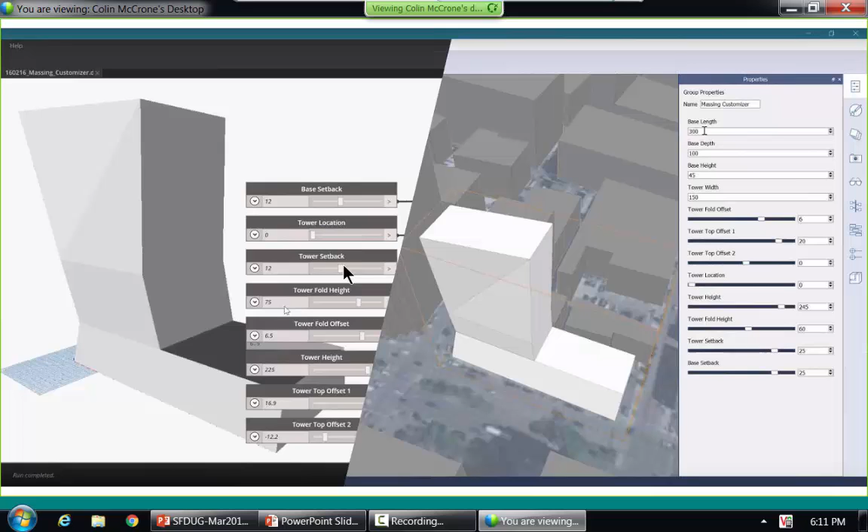Was there a question? Okay.

All right, so you can already publish that, and you have something called a customizer which you can share. And now you can actually use that and put it right into a FormIt model too, which is new functionality that just came out.

Another thing I really want to show is that in the last month or so, the number of Dynamo user groups in the world has exploded from 4 to 15. These are groups that have cities in and of themselves. I made this graphic, so I know what they are: Boston, Atlanta, Chicago, Copenhagen, Dublin, Netherlands, San Francisco, Seattle, Southern UK, Singapore, Shanghai, Washington, LA, Tokyo, and Northern UK. That's pretty cool that happened in the last 4 weeks.

Anyway, I just finished a blog post on that will come out tomorrow, with some other things like that. So, yes, go ahead.

I have to reconnect to the WebEx. I don't think they're getting audio. Sorry, we may not have network. There's no Wi-Fi today, I think. We got a network access attack this week, so sorry about that. Welcome to WebEx, enter your access code or meeting number followed by pound. Do I have to reconnect too? No, no. Enter your attendee ID number followed by pound. Has anybody not gotten the thumb drive? Hello, people on the call, can you hear me? Can you let me know on the chat panel? All right, sorry about that. Go ahead.

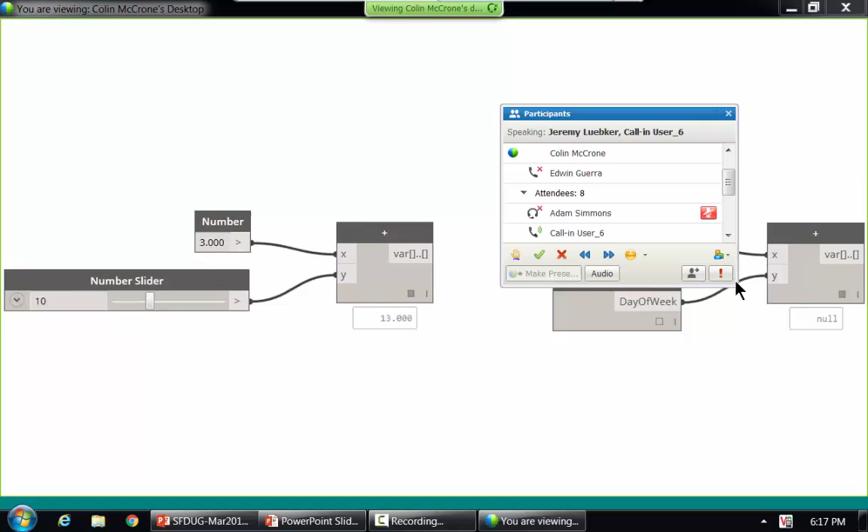And in this case, you'll see this - it's like a racetrack. You'll also see this thing show up in the plus node, which is a good example. Sometimes you'll see this var bracket bracket dot dot bracket bracket.

I had this really great question from Paul Aubin. He emailed me a few weeks ago, and it was this one-liner email that said, 'What does var bracket bracket dot dot bracket bracket mean?' I hope it's a simple answer, which is hysterical, but yeah, I hope so.

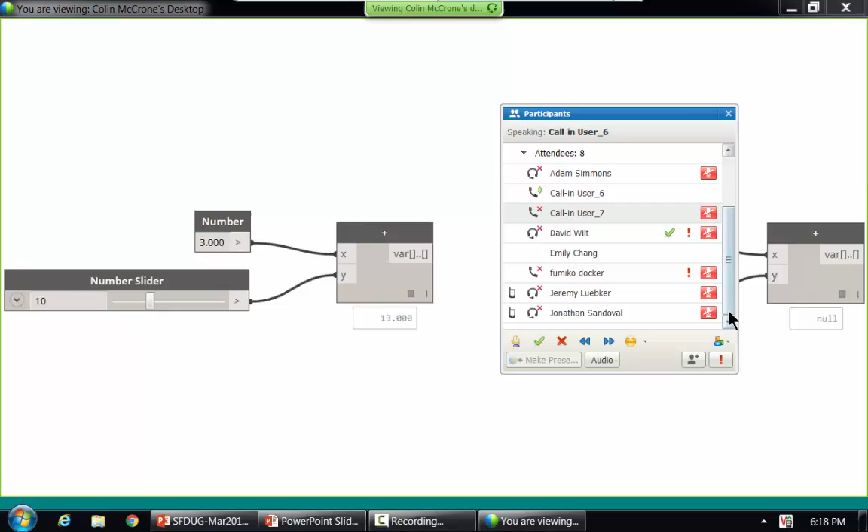So first of all, you know what the var means - the var is just a data type. It just means something, it's just kind of a placeholder. The bracket bracket thing we'll get to next. But I just want to point out that these nodes, like the plus sign, a lot of stuff can come out of it. So you can actually have a double or an integer go in. You can also have text go in, and you can concatenate strings, like stick two strings together to make a longer word, for example. So any sort of thing can come out, which is why you see this, just kind of like, we don't know.

All right, so the next part is - so we know what just the data type is, and then we also need to know about the structures. And so this is kind of how Dynamo talks about structure: you'll see, like if you have a single item, you can take just sort of - on the left it's just a single thing. So in this case it's peas, just one thing, there's always just one. If you have any more structure to the data, say you have a group of them, like in a pod.

This is like a one-dimensional thing. So in order to find any particular pea in that pod, you only need one piece of information, like how far it is from the left or something like that. There's only one coordinate, sort of like your address on a street. So it's a list - you have this bracket bracket in Dynamo. So you'll see that when you hover over input or output ports.

Then you have more complex stuff - so you have like a two-dimensional array, which is bracket bracket bracket bracket. But that just means that now you need two pieces of information to find any one pea. You need to know which pod, and then how far from the left side or something like that. And then there's this thing in Dynamo, which is an arbitrary structure - like it could be a mess, it could be well organized. It's whatever you want. This is like when you get that dot dot.

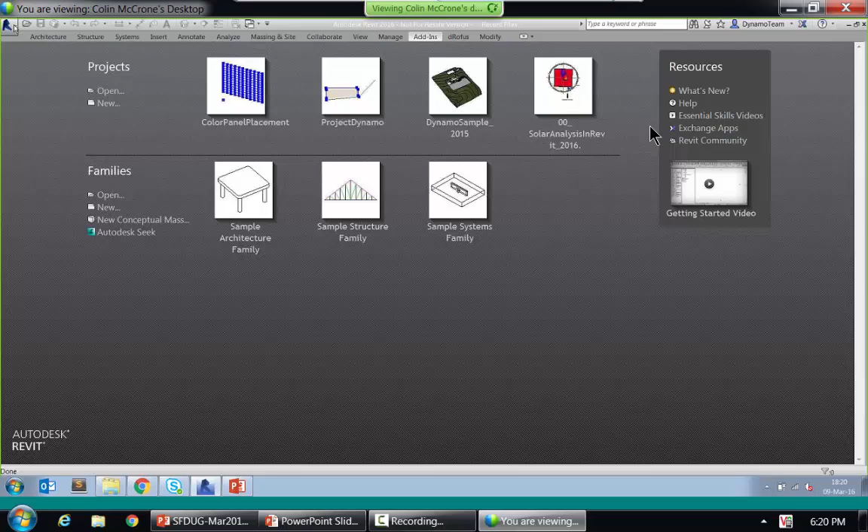Okay, so I just open up a mass file, and what I'm going to do is make some reference points so I can reference them and sort of move them around and group them. I'll show a couple different examples of what I mean by this.

So the first thing I'm going to do is look at a node called Circle, by center point radius.

If I zoom in and hover over this, it's kind of hard to tell, but the first thing says Point, capital P. So if I gave it something like a day of the week, it wouldn't work - I'd get a null value. It's looking for something that's a point to be the origin. Then it's looking for a double value, a radius. There's no bracket here at all, it's just a single thing - a single point, and then a single number that's a radius.

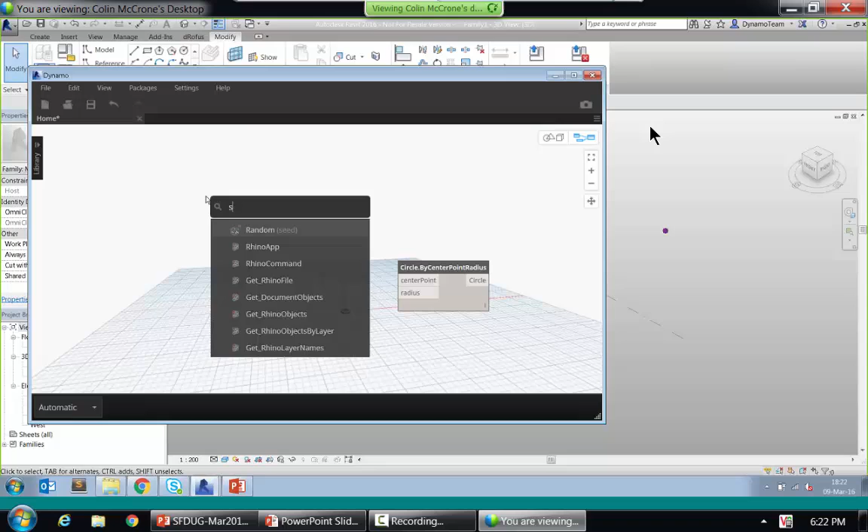So we can give it a few points here. I'm just going to create some points. Here are some reference points. So what I'll do in Dynamo to get those is select them - I'll say Select Model Elements, just waiting for a selection here, so I'll get those. I just have a bunch of points.

And if I look at this, I can already tell that I have a list of things, and they're giving me reference points, so it's an element. What I want to do is just get the geometry from this - Element.Geometry. So this is going to give me the points from that.

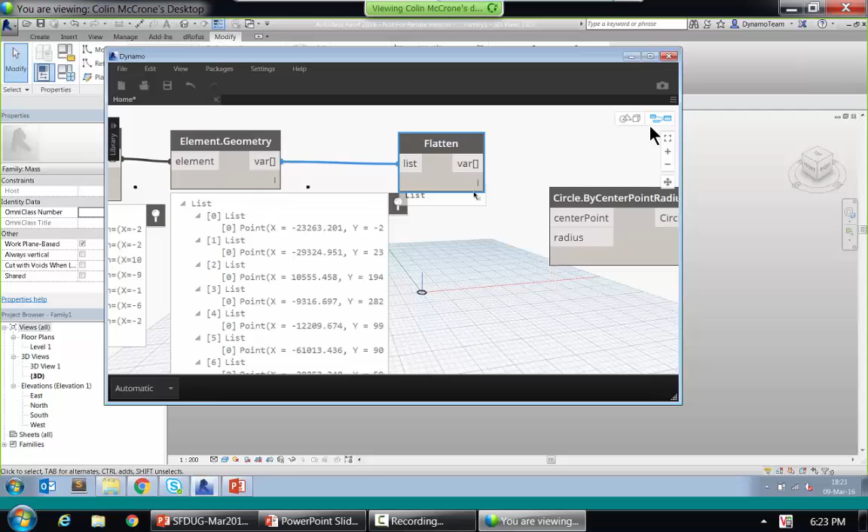So if I hover over this and pin it, you can see I have this sort of messy structure. I'll get back to the circles in a second. I'm just going to flatten this list because all I wanted was a list of points to show what happens. Pretend like this is our input here - all I did was select a bunch of model reference points, got the point from them, and got rid of that structure we didn't need. So here's the input - now I have a bunch of different points.

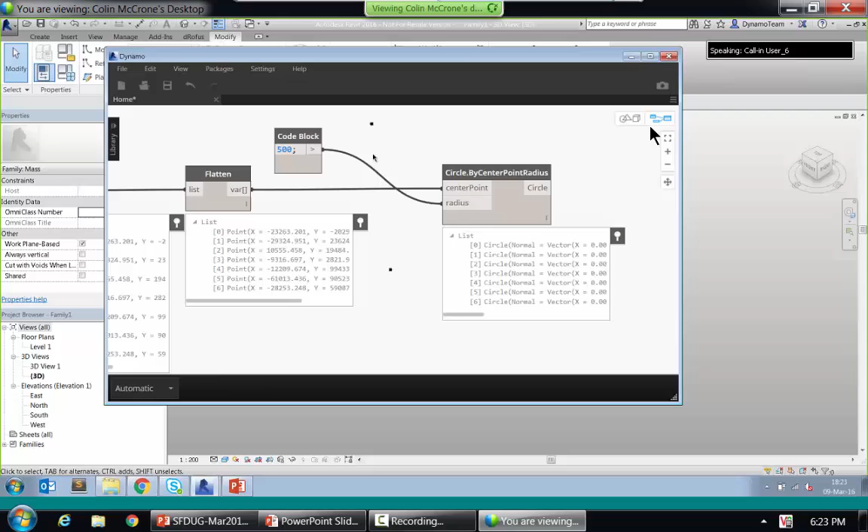But Circle.ByCenterPointRadius is looking for a single point, and since I'm going to give it a bunch of points, I'm going to get a bunch of circles. In fact, all my circles are really small because this is in millimeters, so I'm going to give it a different radius - I'll double click and give this a big radius of, say, 500 millimeters. Man, I am not used to thinking in metric. There we go, a little bit bigger - let me make them super big. Okay, so here are my circles.

So what happened is this is a list of points, and the reason I have a list of circles that came out is because this node is only expecting one point. So since I gave it seven points, this node basically acts 7 times until it stops.

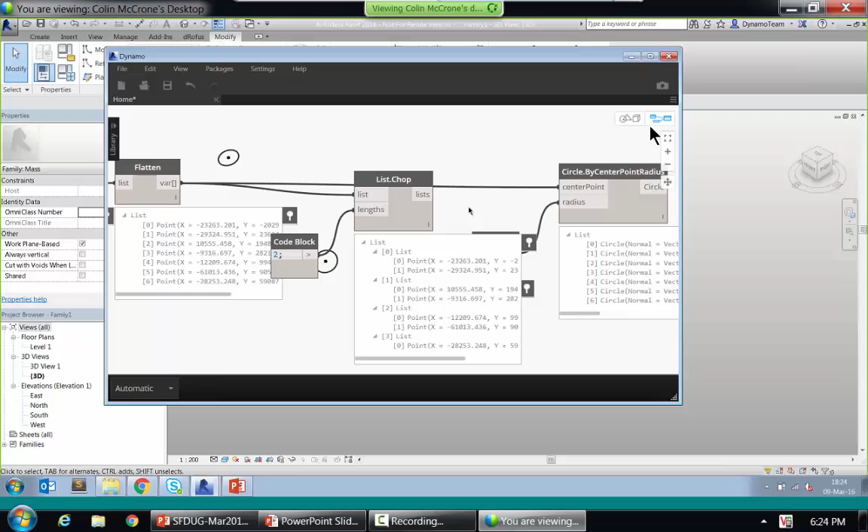And I can actually introduce some more complexity in this data too - I could say List.Chop. One of the things List.Chop does is divide this list up into lengths of things. So now I have a list of lists of points. But since Circle.ByCenterPointRadius is still just looking for a single point, it's still going to work because the first time it finds a single point buried in the data structure.

So you know that Dynamo can be super sensitive to the data structure based on how it works, but it's also based on the node. The reason this worked as well as it did is because it was expecting just a single point - it doesn't matter what I threw at it, it will replicate the same number of times so I get the same data structure out as I went in. Was that confusing? Yes, okay.

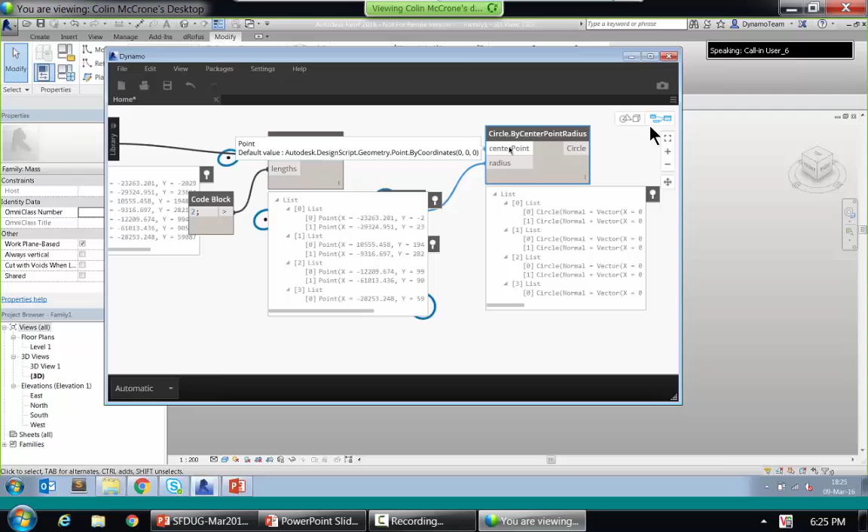All right, so let's see if I could do it another way. I still have the same number of circles - you can see the input list of points matches the input list and structure of the circles that come out. But the same would have been true if I had just taken the first one - I'll say First Item from this, so this is going to be just a single point.

And I can just pin this guy. All right. So in this case, now I have just... I lost my, there we go.

So I have a single point and a single circle. By the way, we're redoing these preview bubbles, they're a little weird. Anyway, now what I have is it expected a single point and a single radius, so that's what I gave it. I gave it a single point and one radius, and I get one result. If I gave it any structure of more points, I'll still get the same result because the data structure matches the input structure.

Because it's just looking for a single thing, I think it'll be clearer if I show you another example. So instead of making a circle, I'm going to make... it'll take, when you give it multiple points within a list, it took the list and ran the points.

But every time it found a new point, it gave me a completely new circle. If I gave it two different points, I'm going to have two different circles. It doesn't matter where the points are or what they look like, it'll just give me a circle per every point because it only wants one. But this is not the only type of thing, this is the easy example. It only wants one thing.

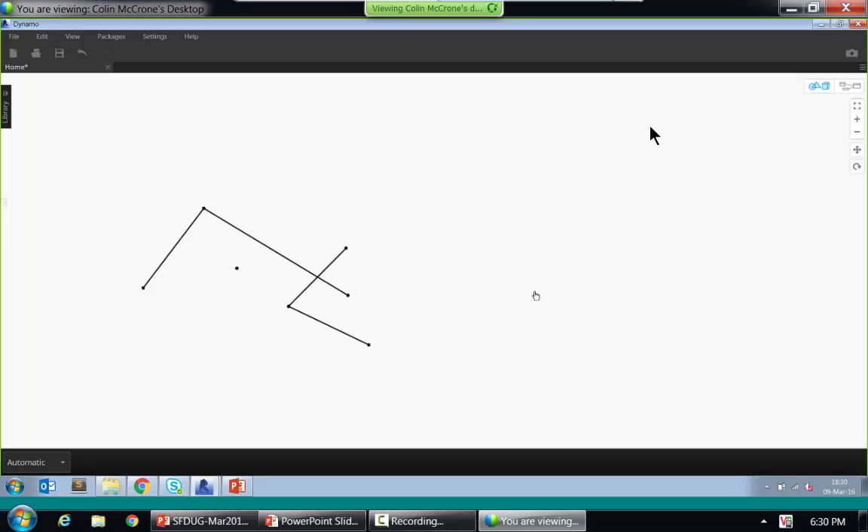What happens if you feed the polycurve node with the same point twice, like if you're giving 2 points but they are the same? It will fail, but for a different reason. It's not for a structural reason - you could have a list containing 2 points that are the same point, and the polycurve will still fail, but it's because it's a logic error in that case, not because of the structure of your data.

But actually, it won't just fail - it'll give you a null value, which is actually useful information. Null is a good piece of information. We'll talk about this at the very end, like List.Filter by Boolean mask, and show how you can actually filter those things out if you wanted. That could be actually good information.

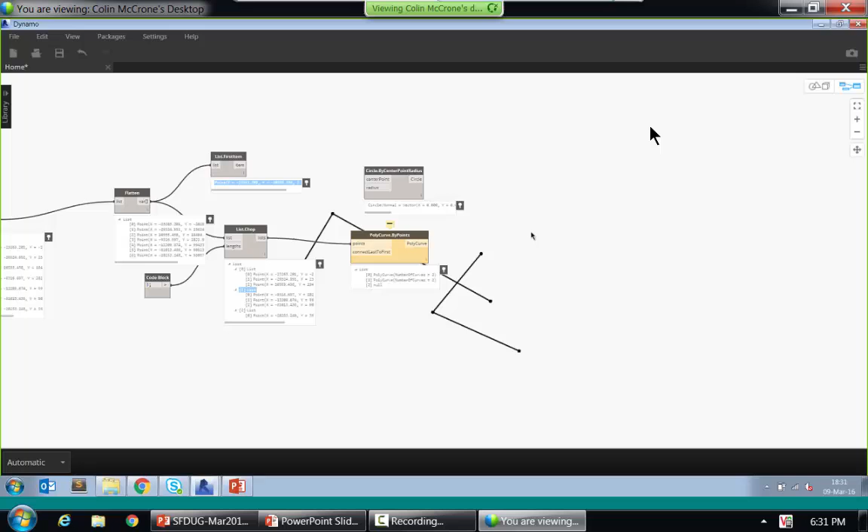Alright, so here's another case where we might want to do something else. I'm going to open up one more file that I gave you earlier - I'll come back to this later - cities by Boolean mask start. So just drag that there, and there are 2 lists in here: a list of cities and a list of countries, and they correspond where the countries are.

One of the things I want to do is make a list of these 2 things, so I'm going to say List.Create, taking this list in and this list, and my result is going to be a nested list. So here I go - I have a list of cities stacked with a list of countries.

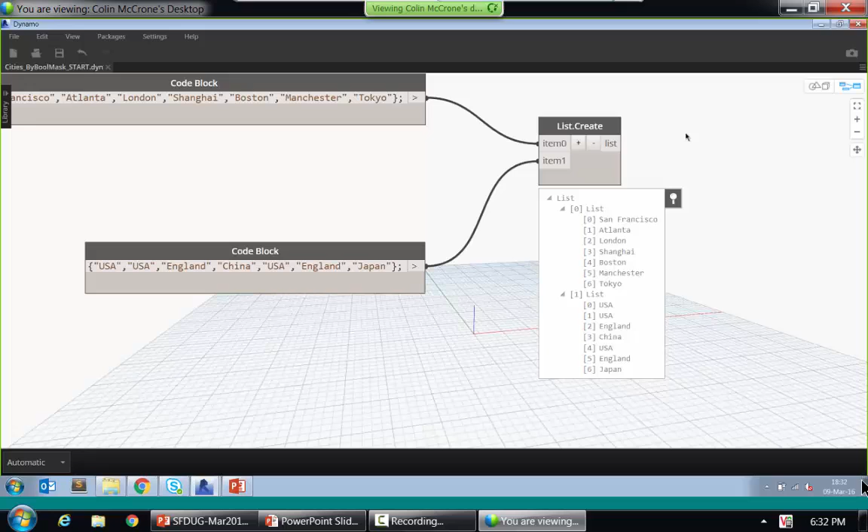So I'm going to show you a different node in Dynamo that acts yet again differently. We talked about a node that replicates on one thing and then a list of things, and here's a node that wants a list of lists - this would be List.Transpose. If you hover over this, what List.Transpose is looking for is a 2-dimensional piece of data.

In this case, if I pass this in, what it will do is, the first time it finds a list of lists, it will basically operate - this flips the data. List.Transpose takes your data and kind of mirrors it like this, reordering the columns and the rows. So the first thing in the first list gets matched to the first thing in the next list, then the second thing, third thing. So you can kind of see how this makes sense - San Francisco, USA, London, England, Shanghai, China type thing. We're sort of matching items in the list.

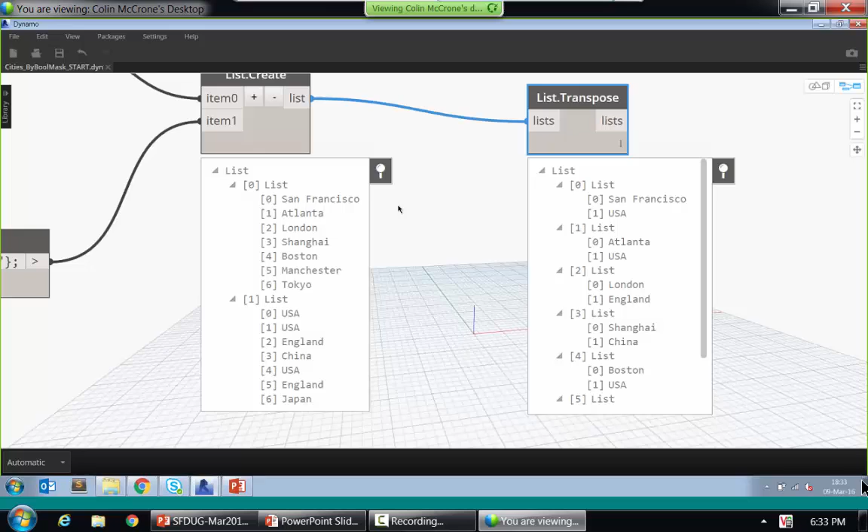But this is an example of something that is looking for something more complex. Now in this case, this has a var bracket bracket dot dot bracket bracket. I know, because of the way List.Transpose works, that it's looking for something working on two dimensions. But if I want to force this to work at a particular level in my data, that's when you're starting to get into something like List.Map, if you want to move these things around. This by itself will always work on the top level of data - even if I have 3 levels deep or something, it'll still only work on the first top 2 layers, because it's only looking for 2 layers, and it'll stop.

Since it can take anything as a result, if I want to move it around, I have to use List.Map or something like that. But I don't want to - List.Map is confusing enough, I kind of want to leave that for another thing. And then there's more to show, some practical applications here - how can you select items based on a pattern, like a Boolean pattern?

Yeah, every 5 or every 6 items like this. I want you to save that question, because at the very end we're going to do 5 or 10 minutes on list.filter by Boolean mask. Why don't I answer that question then.

Okay, excellent. I want to open one more file here, Dynamo D data management. So here you go. This is a more complex graph, there's a lot of stuff going on in here. Don't worry, if you open it up, it should just work. I should never say that out loud, but it should work.

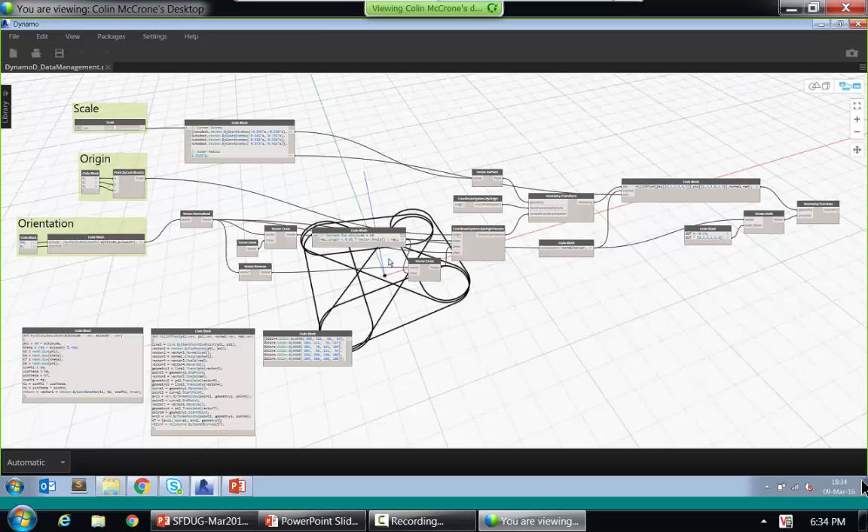So this is a little Dynamo logo right here, it's a riff on it. You can scale it so you can make it bigger or smaller. You can even orient it differently, like make it go at a 45-degree angle. This is like altitude azimuth stuff, like in astronomy. I can turn it around partly, for example.

So this has 3 inputs. It's really a scale, an origin point. I can also move this around in space. I can say I want to move this to 30, move it way over there. I can sort of rotate it. And this all works nice, great.

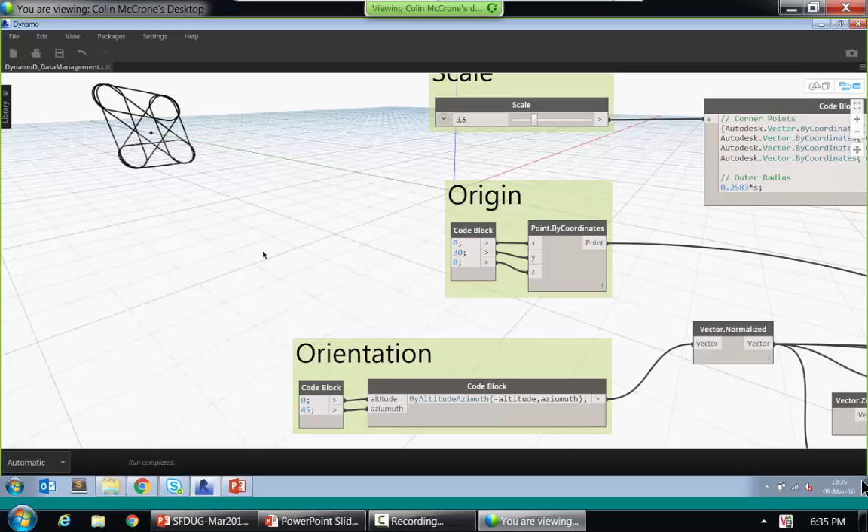I'm glad it works, but it works for 1, right? Just works for 1 Dynamo D. What if I wanted to do something like, let's pretend I don't care what's happening in the rest of this graph. But what I do want to know is what happens if I gave it a list of origin points, not just one origin point. Well, the way I constructed this graph, it works really well for one, but if I gave it a bunch, it may not work so well because I didn't really account for that.

So you know how you make a list in Dynamo with curly braces, right? Are you familiar with this? Anybody not? Okay, I'll show you really quickly. In a code block, which you get by double clicking, you can write a single number like 5, and then you get 5. Or I can also make a list with curly braces like this - curly braces, and I'll say 5 and also 20. This makes a list, basically 5 and 20. So I'm just going to use curly braces to make a list.

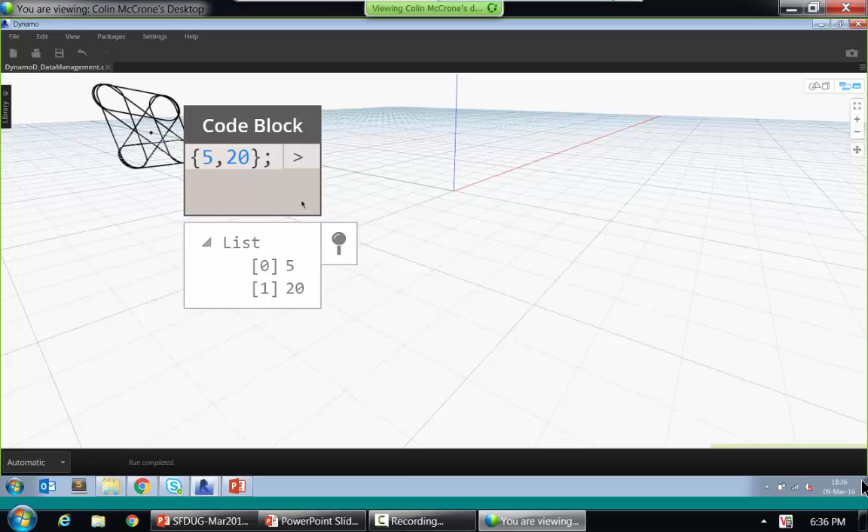This point by coordinates, I gave one number each to each of the inputs, and each of these inputs is looking for a single value. In fact, you can hover over it and see double. So if I give it a list for any one of these, that'll get a list as an output. So if I change the input for y, let's say I want it 0 and 15 and 30. What's going to happen? Well, I did get 3 points as a result, but it totally broke my definition, because the rest of the definition was not meant to handle that. It just totally messed it up.

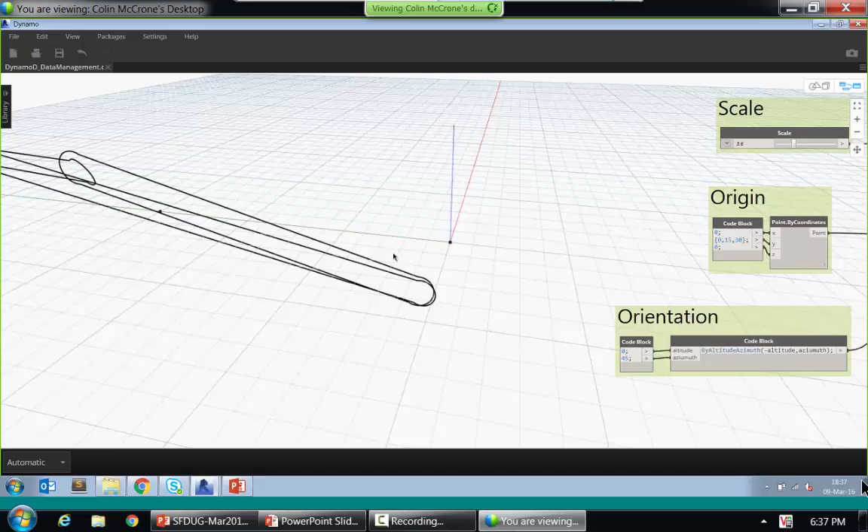So you certainly have the option to go through the definition and change things like List.Map, List.Combine, to move those nodes around so that they're acting at the right level. Or you can use a trick, which is basically just using the data type and data structure I just showed you. So what we're going to do is take this whole thing, all this stuff that makes the Dynamo D.

I'll also point out that the code blocks on the lower left that aren't connected to anything are custom-made functions being referred to - just leave them alone. But everything except the inputs, I'm going to take this whole thing, right-click, and say New Node from Selection. I'll say Make a Dynamo Logo, and for the category I'll put it in SFDUG.

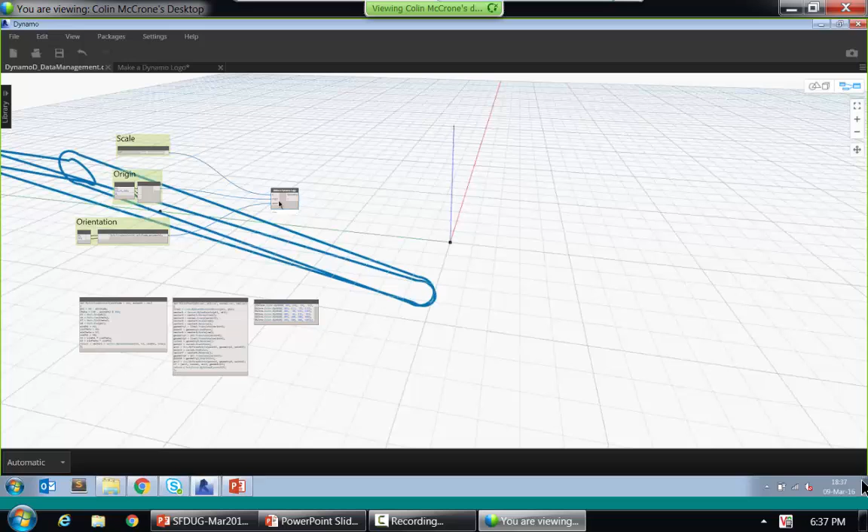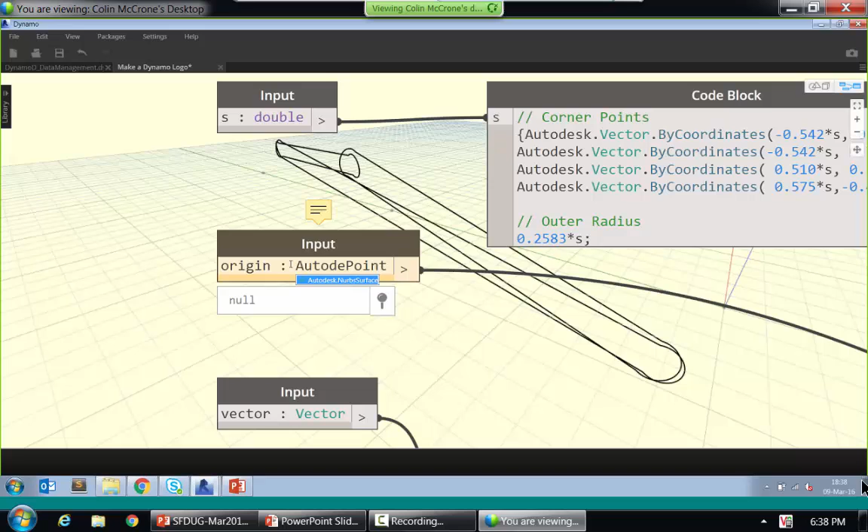So that's a point, and this guy is a single vector. As long as I did that, this is actually just expecting a single thing, not a list of things. That means this whole custom node is now going to replicate correctly, because if I hover over each one of these things, this is a point, a single value. Now I don't have to go through and make sure all the individual things line up, because I just wrapped it in this thing and made it do its own thing.

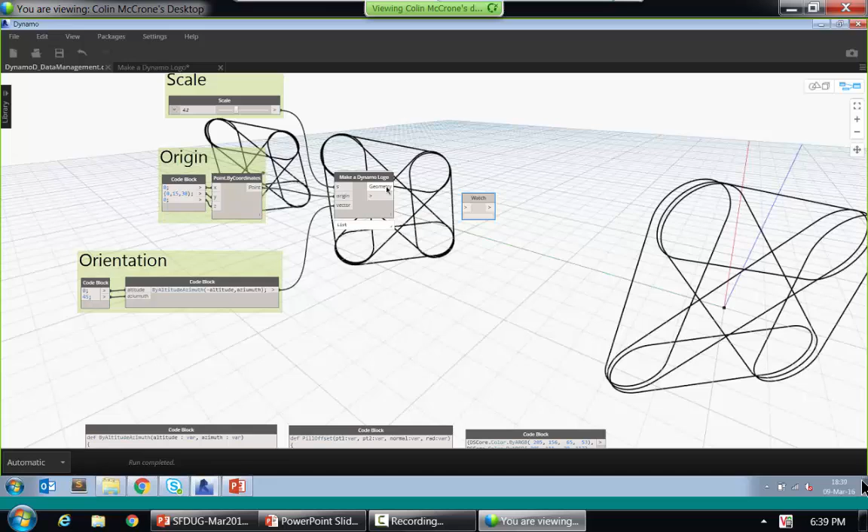So no matter what I do, I can give it a different scale value. I can make them all bigger, that kind of thing. And then that's happy.

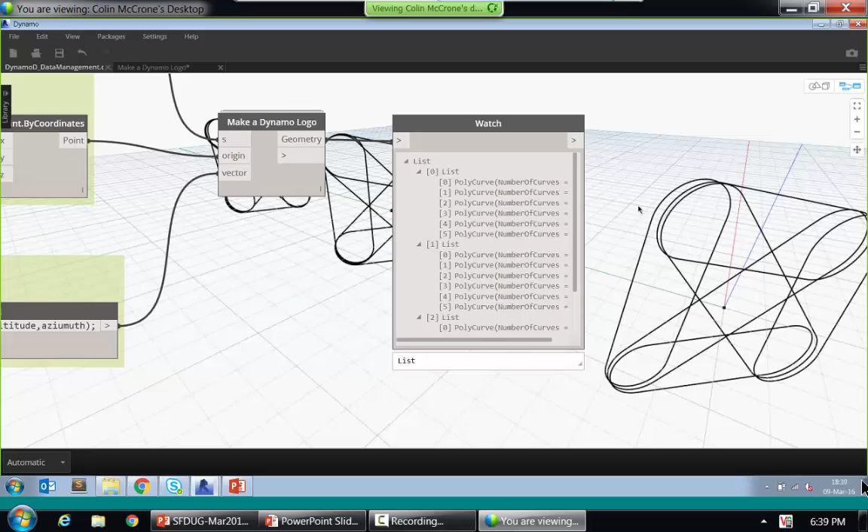As a last fun thing here, I'll show you this, because I wanted to briefly mention List.Combine before I hand it back over to Edwin. You can see this is a list of polycurves that came out organized by the logo, so I have 3 major lists with like 6 lines in the middle. Here I have the color values for part of the Dynamo logo.

So how do I make sure these things are colored correctly? One thing I can do is this whole first color, there's 6 values. I want this whole thing to apply to just this one, this second color to this one, no matter how many of these I have. So I'm going to flip the organization of this list so I have all the right bar in one list, the middle bar in another list, that kind of thing. So I'm going to use List.Transpose.

This works because, well, it's a little neater if I do this, I think. So now I have this organized not by the logo, but by the color being associated. Now I want to go to this guy.

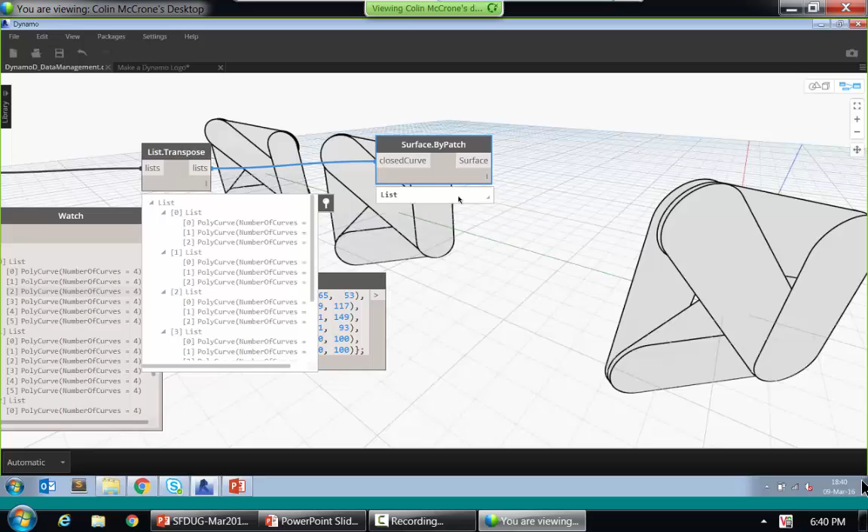So this is geometry, it's not a surface, I have to make this into a surface. So it's a surface by patch. So I can do that. These are going to be almost there—this guy is individual surfaces. Cool.

And then you can also color things, so there's this Display By Geometry Color node. This guy is looking for one single piece of geometry and one single color. But now I have a problem because what I have is a list of geometry here, and then a single color. This single color applies to this whole list.

So now I have an offset thing—it's kind of like your first cousin once removed type, it's just weird, it just gets odd. What I want to do is force this node, even though it's looking for a single piece of geometry and a single color, to work at that one level of the list down. So the last thing for that is List.Combine.

So if I make this my function here, and then I fill geometry and color—the geometry goes here, the color goes there—then I can turn off the preview for this guy, and you have a bunch of Dynamo logos. So this is how you get around the issue when you have things that are not symmetrical.

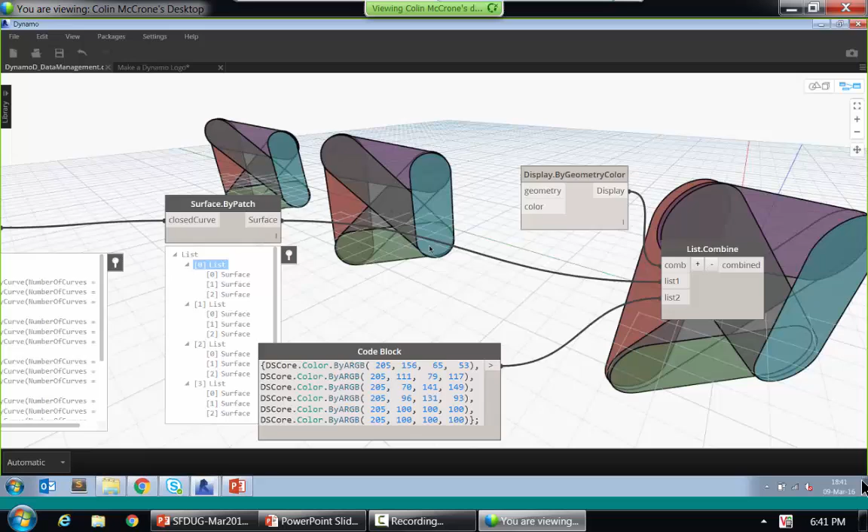Any last questions? I think I ran a little bit into Edwin's time—I really apologize.

Actually, I think I was exactly at half an hour. Okay, good. Let's check on our audience. We can also come back to the end if you want to discuss it further.

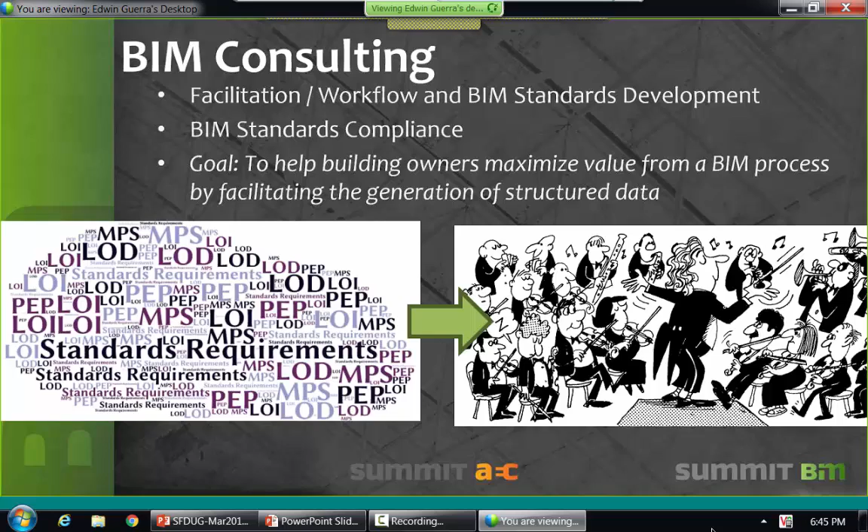We're trying to help them realize the value of BIM by generating structured data. So a lot of what we do is we help develop through those facilitation and workflows and questionnaires and surveys what it is as an organization that they value. We translate that into things that we in the BIM world understand as BIM standards, a level of development specifications, level of information specifications, project execution plans, and more, so that basically everyone can play in the same field, knowing what the expectations are.

Similarly, there's other viewers like Solibri Model Checker that we use. These are sort of in between. They also help us audit models. But basically, these are exported from Revit. So there's certain things that we can only audit inside of Revit, and that's what I'll touch on later when I get to the examples. So there's things like the number of warnings - basically, we have no real way of automating that extraction of information.

I'm receiving a call. Can you still hear me? Yes. Okay, so I'm not going to take this call then. Sorry.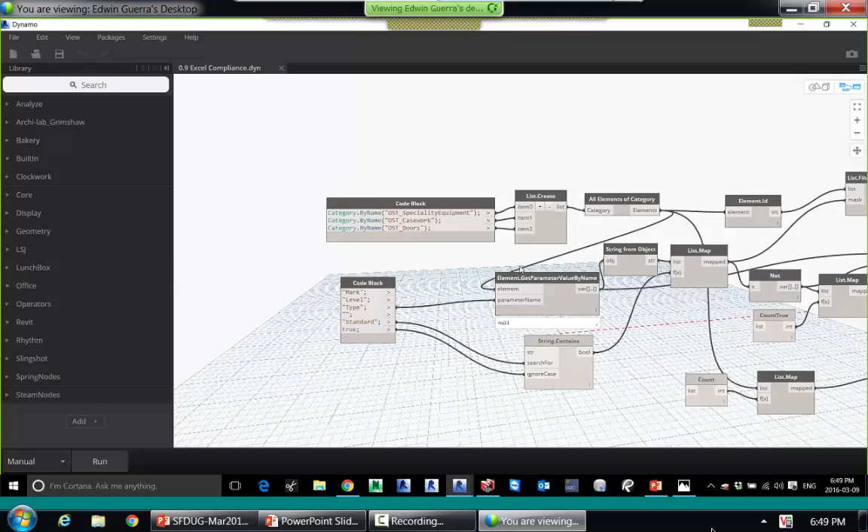So with that being said, I can jump into Dynamo. This is not necessarily a node that I'm going to go through in much detail. If you've seen Colin's presentation at the San Francisco Dynamo Users Group last October, he went through something very similar, which was basically writing to Excel some data from Revit. Here, the only difference perhaps is that I'm pushing several categories at the same time. So I'm using that list.create node to not only look at one category at a time. I could increase this to start looking at additional categories.

So I'm looking specifically here at loadable families. If you've spent some time in Dynamo, there's different ways that you access system families and components or loadable families, which makes a difference. But in essence, what we are checking here is compliance. We're looking at the type, parameter name of all these elements, and seeing if they have some words that we have on our blacklist, like standard, default, or typical.

And we want to automate that, right? We don't want to have to generate schedules, export them, and then see what's wrong. So to make the story short here, we're calculating some compliance metrics, and we're generating some Excel sheets.

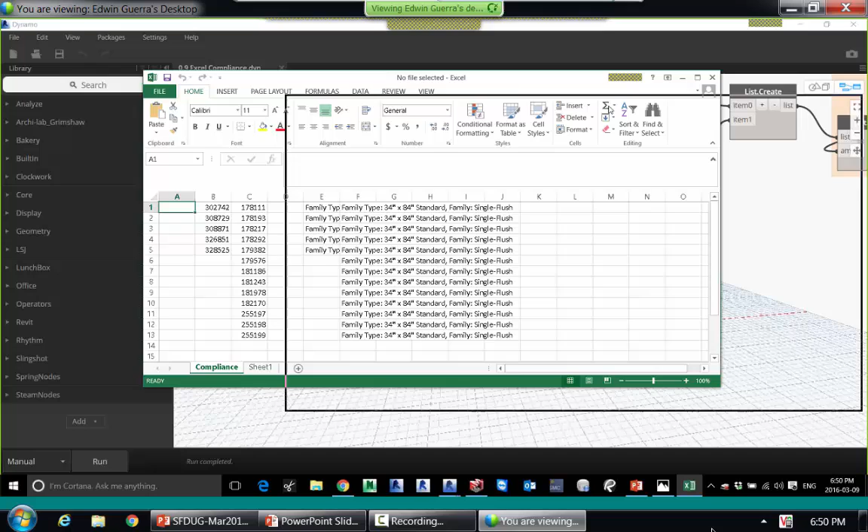So if you remember, I was looking at 3 different categories, one of which was doors, casework, specialty equipment is the first one. And just because of the way that it's transposing, these are the items that are non-compliant. So these are types that contain standards somewhere in there. It's evident here, and it's evident over here, and we're also reporting the element IDs. But we can also calculate things, and if we wanted, we could push this information to Excel.

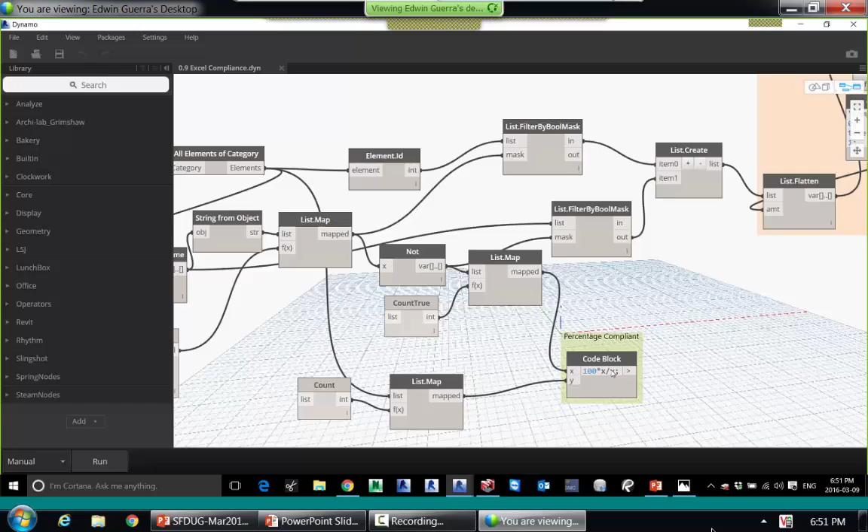So specialty equipment is compliant. Casework is 50% compliant, and the last one, doors, is 59.3% compliant. So getting that type of information is pretty valuable to us, but it's not particularly exciting to look at, it's not visual, right?

So similarly, we have ways of looking at things like in-place families, and this is very similar too. We're looking at different categories, creating a list, extracting the family type of that, because basically on the Clockwork package there is one valuable node that is family.isInPlace, which basically takes in a family. So that's the reason we go from elements, we extract the family, and then we have that as a way of checking. This is generating a list of Boolean values.

So that's true or false of which families are in place, right? Compare this to the traditional way, which is opening up Revit and having to go down and guessing. Usually under generic, there might be some, and then seeing patterns, right? So if you see a 1, 2, 3, that means that they're probably copying an in-place family all over, which is not best practice, which can create issues down the line because these are likely the exact same geometry.

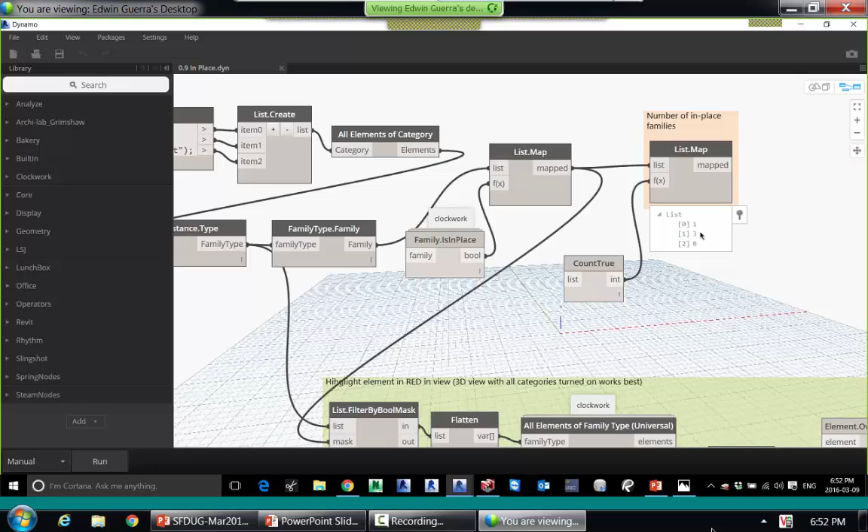So by doing this, we have a way of similarly getting a list of how many families in each of those categories. So in Windows, there's 1 that's in place, and 3 that are in place families under generic models. And this is again automated, right? Something that's very hard to check visually, that's prone to error, and we now have a way of quickly accessing that information and reporting it back.

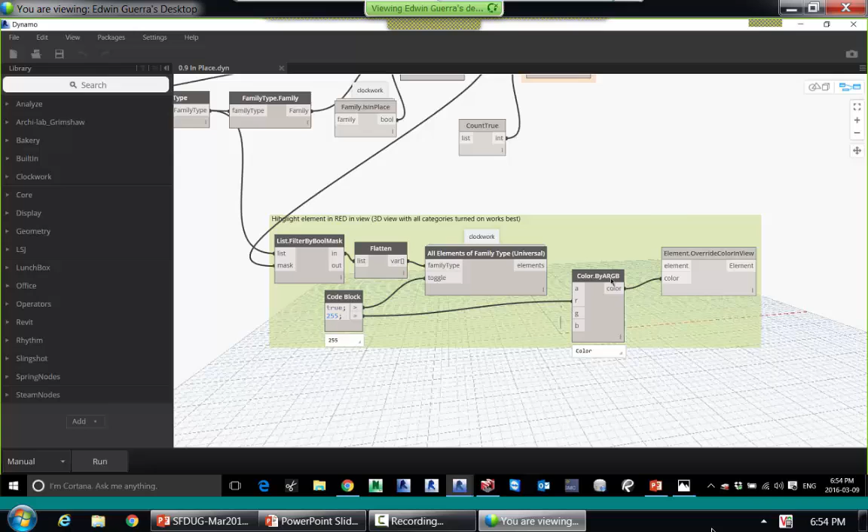So we can take that a step further, and now that we have a list of Boolean values generated here for every category and every family type, we can then use that as a mask on the original family types that were reported from Revit, so that we're isolating essentially those which are in place. From there, we can select all of those elements from that family type, so we can go to the element ID level and basically color code it using this color node so that we can turn them red and flag them, right?

So all I have to do here is connect these two, hit run, and ideally I should... whoops, something went wrong there. See? Okay, let me just try this in a different view that I have set up. See if that helps. I have to apologize for this because I'm not sure why I'm getting some null values. But the idea is that it's basically going to turn them red.

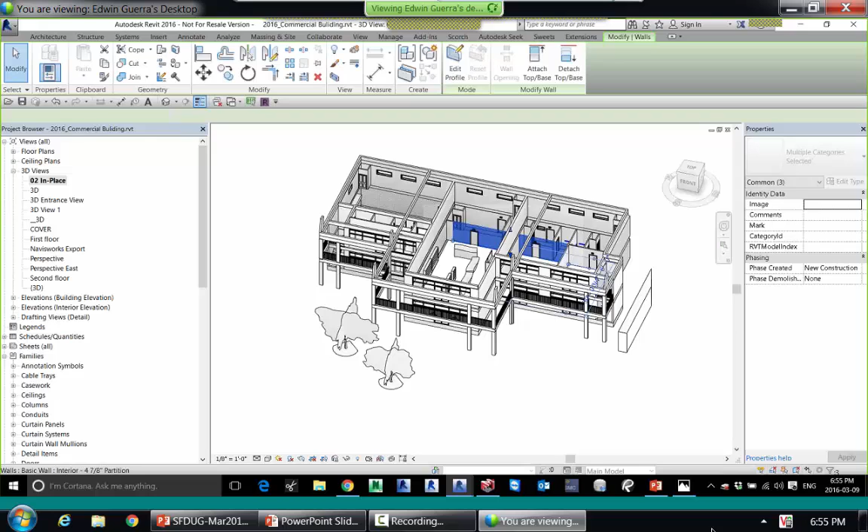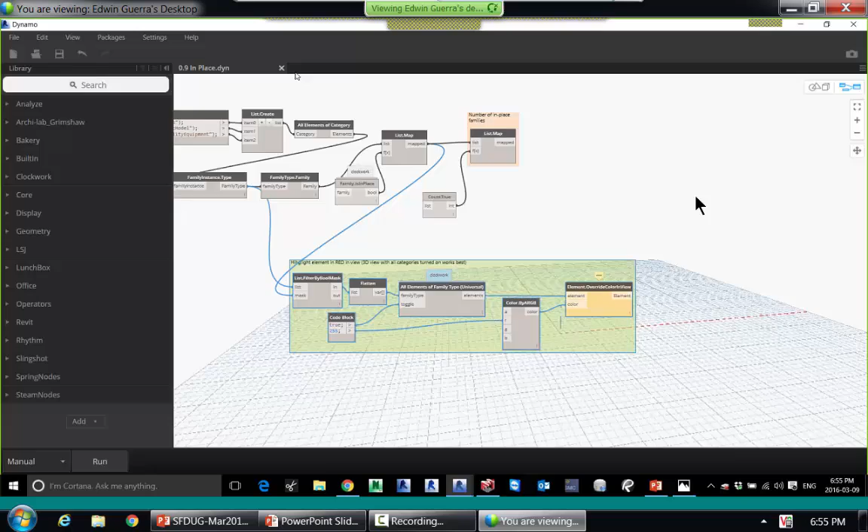So what we would have seen here is basically these families. You're in manual mode, hit it to automatic. Oh, exactly, thank you for that. So let's try automatic, see if that helps. Yeah, I'm not quite sure what's going on there. Everything looks right to me. Let me just see if that makes any difference.

So the idea is we can report and produce Excel sheets, and that's nice because we can track it over time, graph it, and communicate it to see that things are getting resolved. But it's also nice to have a visual cue at some point that we can use to verify that things are being done correctly.

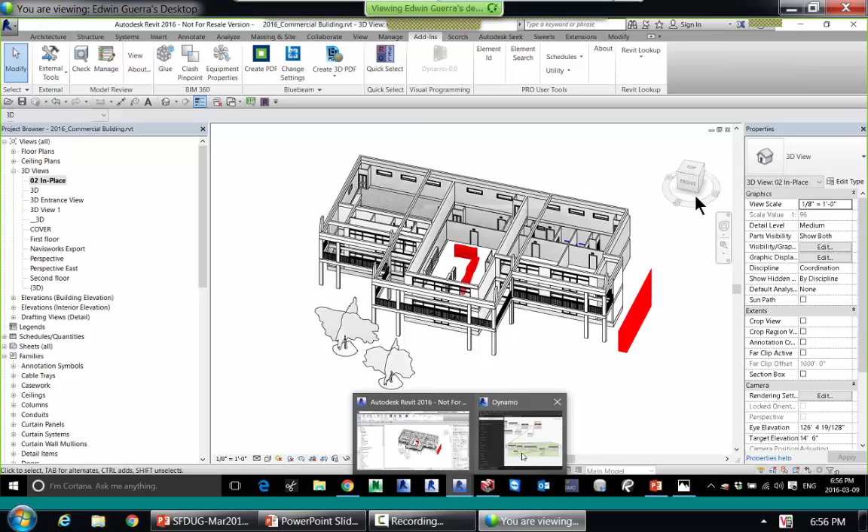So the idea here is we've color-coded in red those in-place families so that there's no question about where they are located. We just turned off the floors in this view, and we can run it again in a different model. That's the beauty of Dynamo, is that we can reuse this information. The setup is really automatic: as long as there are categories being used, and as long as there are in-place families, we'll be able to report them.

So from there, I'm going to open up a different file to go further into this color coding. This is something we started seeing very early on, and I apologize that I'm just showing sample files. I'd love to show you some of the work we're doing with our clients, but obviously we can't get permission due to the nature of the work.

So color coding is something you can do inside of Revit. You can create a filter, for example, to look at the lengths of these beams. But if you were to do that, you'd have to do it manually, going to Visibility Graphics and setting it up on each view, which is quite a bit of work because you have to manually maintain it, and you have to set it up for every single project.

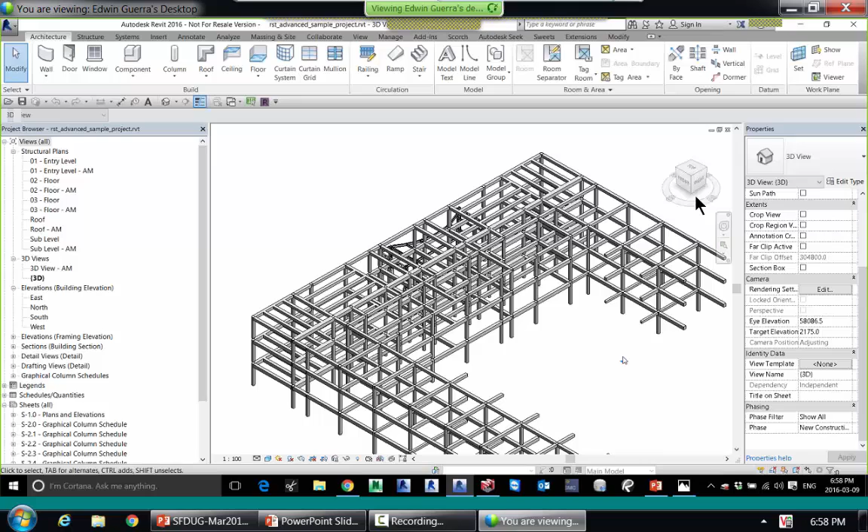So Dynamo actually has an override color node that is very powerful and has improved over the years. And that's what I'll show you next.

The idea here is that this is more geared towards design, because designers are not necessarily used to getting feedback in this way. What we're doing here is we're again grabbing structural framing. I like to select the categories this way, which is probably a legacy, because it used to be that you had a drop down, and I always got annoyed that whenever I opened the definition, I had to scroll down a super long drop down to get to the category I wanted.

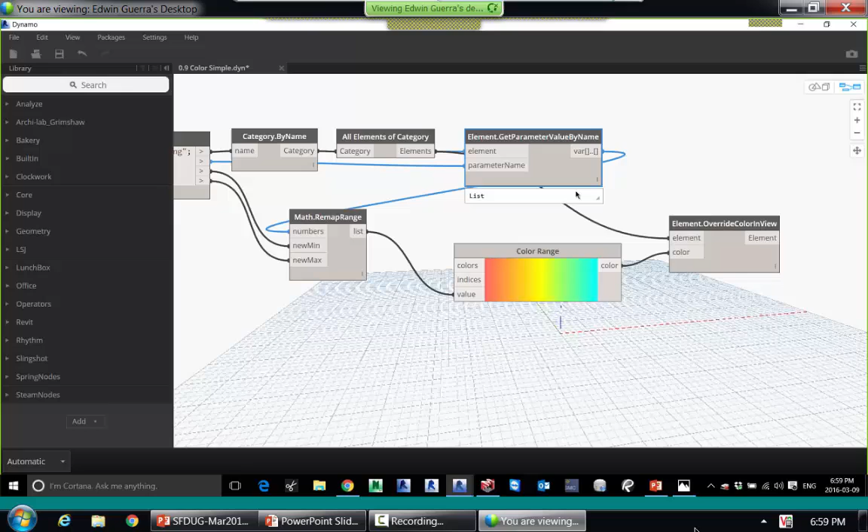So this way I can basically hard code it in, so that as soon as I open it, it's there. The idea is that I'm selecting that category, grabbing all the elements from it, which in this case is all the beams, structural framing, and from there I'm getting a parameter which is the length parameter that all of these elements will have. I'm then remapping the actual reported length so that I can get it into a range between 0 and 1.

The reason we do that is the color range node only accepts values between 0 and 1, so you have to normalize your data. That's what we're doing here, so that the shortest beams get one color and the longest ones get a different color. Then we're just passing those same elements we collected initially to override them in the view, and this is what we get when we do that.

From a design standpoint, you can start looking at patterns. That's the beauty of using colors: very quickly you can start detecting patterns, and things that might be wrong can jump out at you, but also opportunities for standardizing your beam size, so that kind of analysis is possible. Designers can get feedback into what they're doing and realize new opportunities.

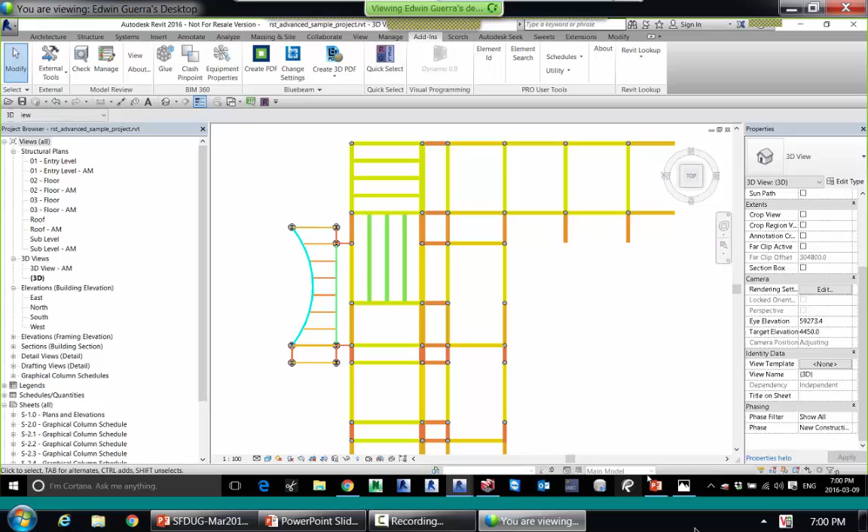So the same way we did this, we can very quickly do other categories—we could do columns instead. The idea is that it works very nicely for these type of problems where you have basically a double, a number with a decimal point, a continuous range. It works very well.

So then what I wanted to do next was look at how we can deal with things that are not continuous but discrete. For example, if we wanted to color code things by type, how would we do that, so you had a visual cue in color of what types are loaded into a project? What we can do then is use the same idea in this node, which I'll share with Cesar so he can distribute. We're collecting, again for a specific category, all the information, and we can extract the type.

We can extract the type name from that type parameter. We can reduce that list, basically looking at all the elements that are in there.

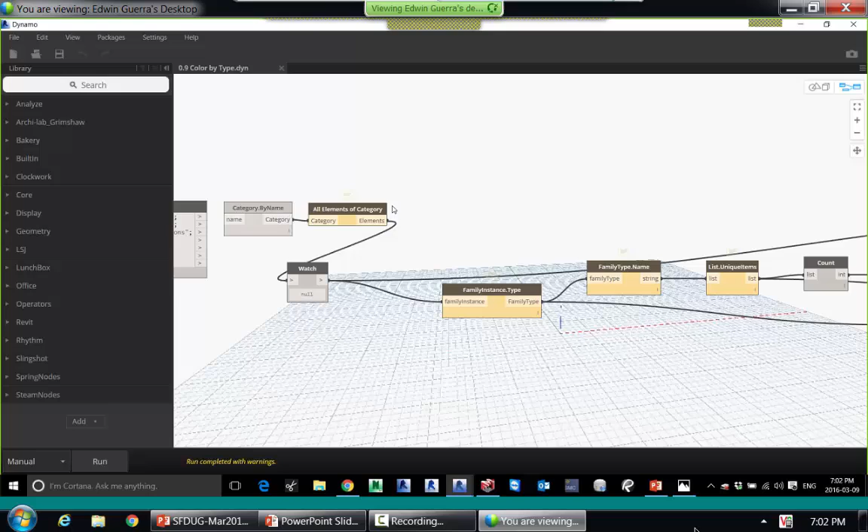So of course I have to connect the first one to that. So this is basically that elements list watch node. We're then extracting the families, the type, so that's the type name, so that we can reduce that list eventually. We can count that, generate a new list again from 0 to 1 that has the counted elements. And then we can push that, and I'm using a specific node from SpringNodes in this case.

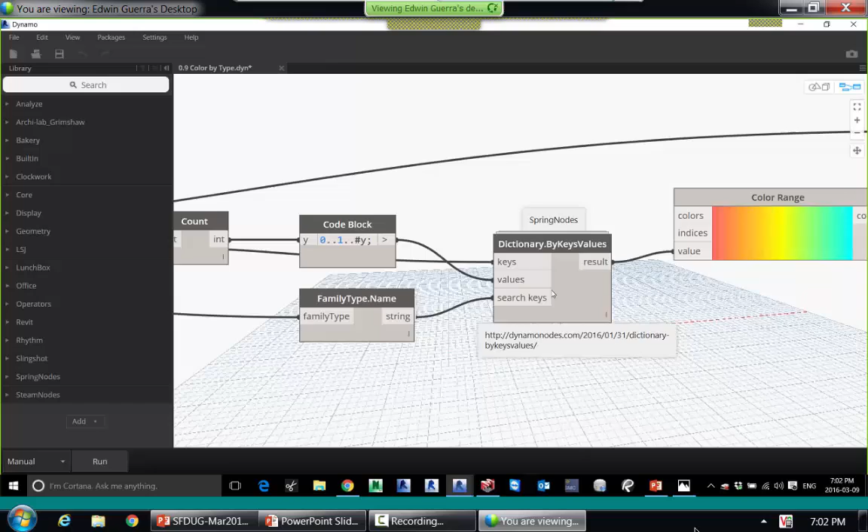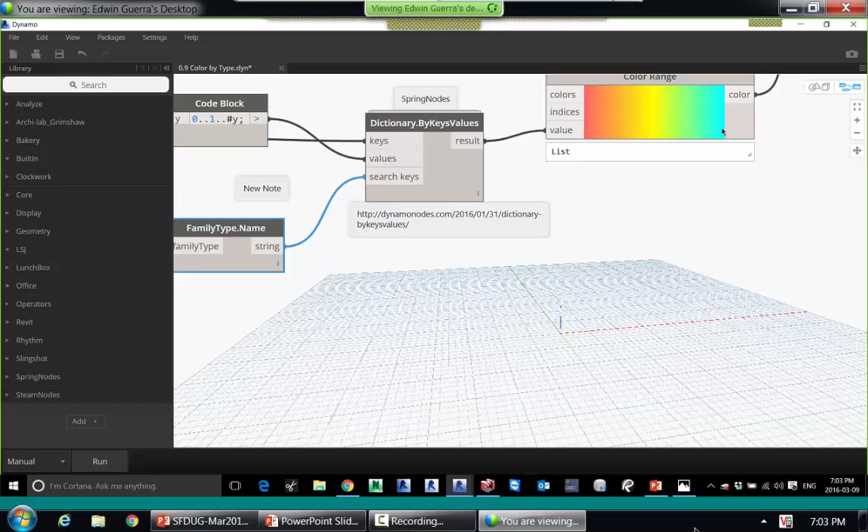That's using a dictionary, so we can create essentially what would be the equivalent of a lookup table in Excel. On one hand, I'm looking at the unique items, the unique types that have been used in this project. And on the other hand, I can look at this code block that is generating as many points within 0 and 1 that is the same length. So the idea is that I can create a search, so that every single element that's loaded into the project is looking up what type name it is and then what value, what color it will get. The color range generates the color, and then we can push back the element into it.

And the beauty of this is that then we can color code by a discrete type, which in this case is doing the column.

So I could maybe just turn off structural framing so that we're not confused. We're just looking at the columns now. So what different types of columns are being used? And they're all getting their own individual color.

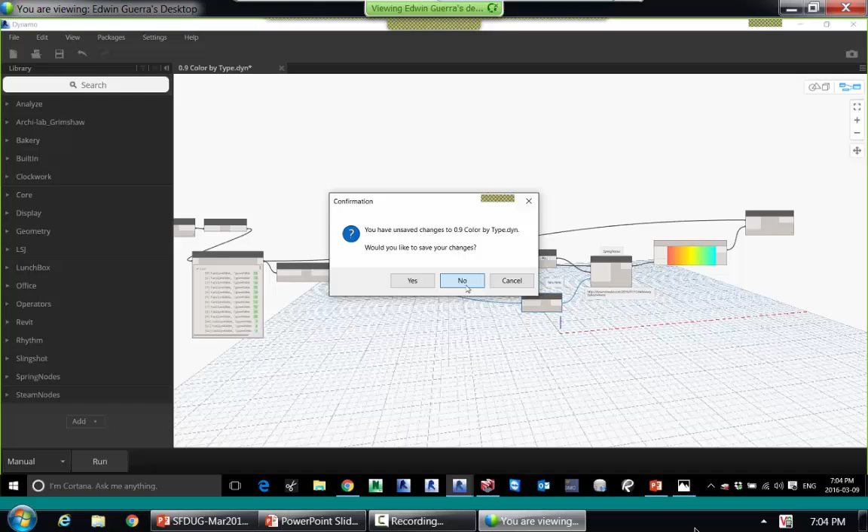So I will extend this now and open up a different file. Let me just close some of this, and I'm not going to save it. And I'll go back to that architectural file.

Looks like I crashed my Revit, sorry.

So as I mentioned earlier, maybe for setting up the next example, what I did here was color coding loadable families again. If we're dealing with system families, things like walls, floors, ceilings, we have to treat those differently inside of Dynamo. So in this case I'll show you a definition that I started off with the same type of definition, but now I adapted it to look at walls.

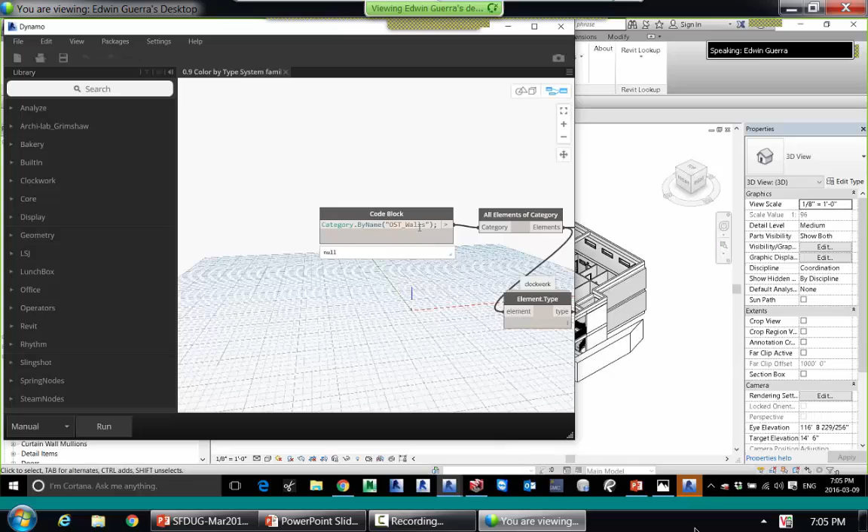So this would be color by system family. In this specific example, I'm going to use walls. So the idea is, again, we select the wall elements however you like. There's different ways of doing it, one being shown here.

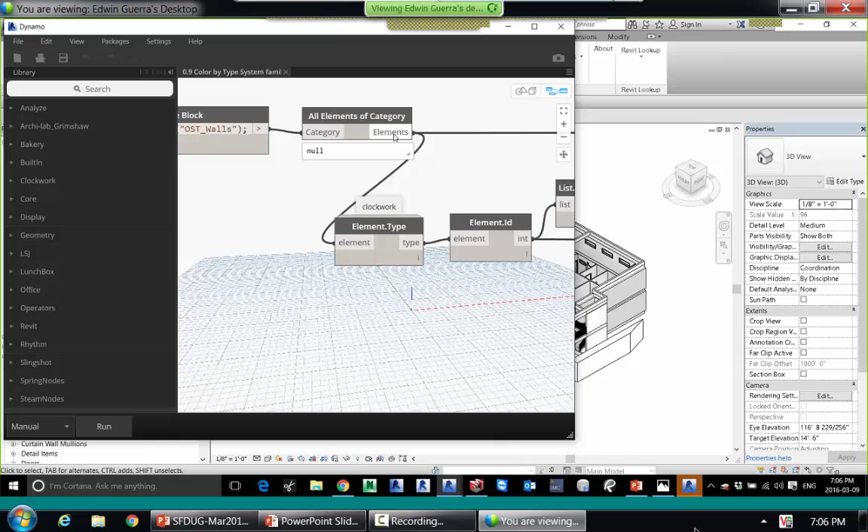Then we can use different custom nodes. In this case, I'm using the Clockwork library, the package. And I'm going to generate the types from those elements, what types they belong to. Before I was using the type name, but I found that to be somewhat unstable, so I actually ended up using the element ID in this case. Basically, this is the ID of the element type.

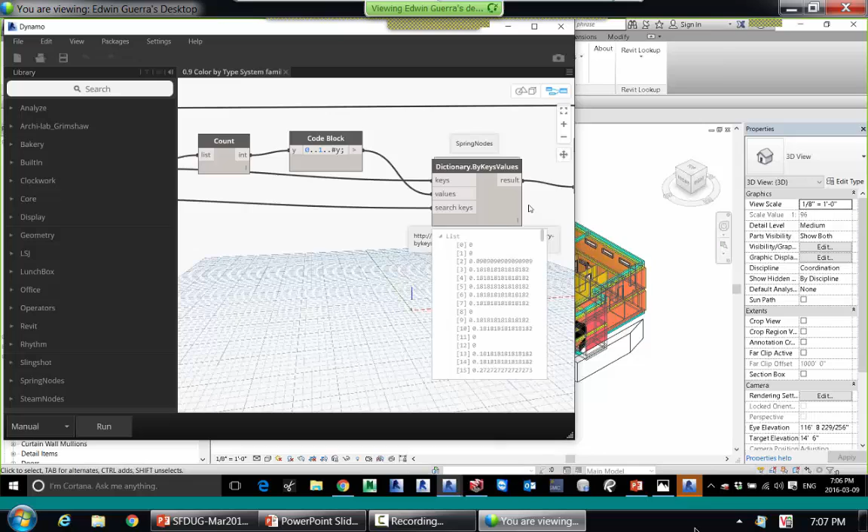So basically it's going to generate that list of all the types, the different types, for each one of those instances. And we can count them, do the same idea of generating enough divisions between 0 and 1 as we have elements, so that we can create, again, a sort of lookup table. Then we can look at every single instance that was used in this model for each wall and color code it, or generate a color for it, and then push the elements back.

So here's the final result, which is basically now color coding every wall type with a different color, so that you can visually inspect and see things that might be odd or might make sense when you're examining a model for model compliance or for good modeling practices.

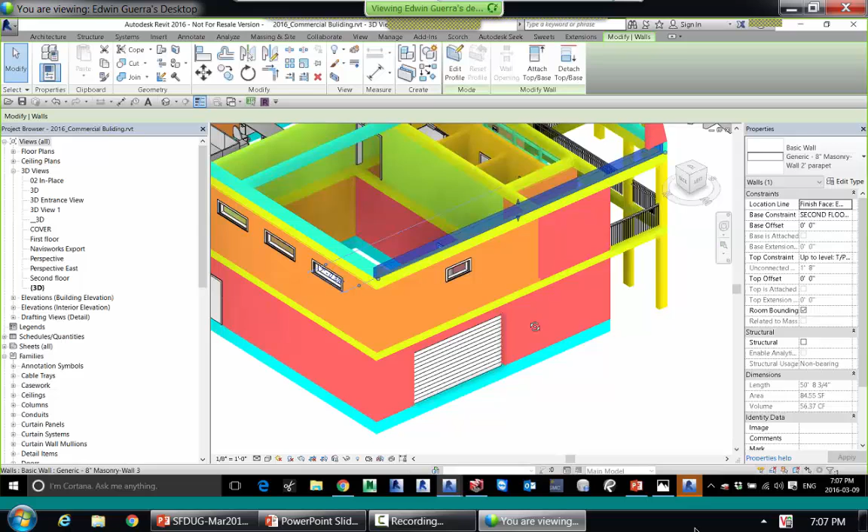Here, for example, it's evident that they've modeled the parapet separately, which would be a good practice. You can estimate it separately, and it'll be a different trade involved. So there's a lot of benefit to seeing things that might seem odd at first.

So, why is this wall a different type? Well, that's a stairwell. Why aren't they all the same type? Are they combining the finishes too with these walls? It's a way of, rather than looking at a list of Excel values, visually seeing exactly what is going on that's wrong, or generating a new discussion of how things might be done in the future.

And as I said, the beauty is this is totally extendable to new projects, so I could open a different project and run the same definition. The setup is very simple. It's using the data that's within the model, I don't have to set it up myself, and I can assign everything a different color very, very quickly.

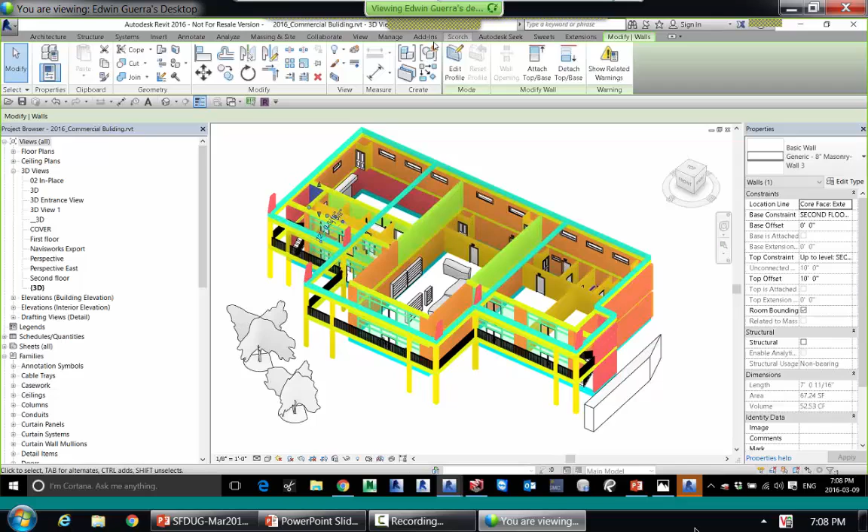So that kind of gives you an idea of the types of things that we look at when we're using Dynamo. The idea is we're also generating custom views at times, so instead of coloring by element type, we could start coloring by information held within the wall, like STC rating or fire rating. We could do walls and doors at the same time and gain new visual insights. Some things are very easy to check visually when you have a 3D model, and not so easy to check when it's non-graphical. So there's a balance, and it takes an art to know which tool is appropriate for each use. That's basically what we've been doing here at Summit BIM: finding new ways of using information-rich models to give us new insights and new ways of seeing information.

I think I ran a little short, but if you guys have any questions, I think we can open it up.

Edwin, I do have a question. This is Cesar. What do you think is the advantage of this method versus the Revit filters?

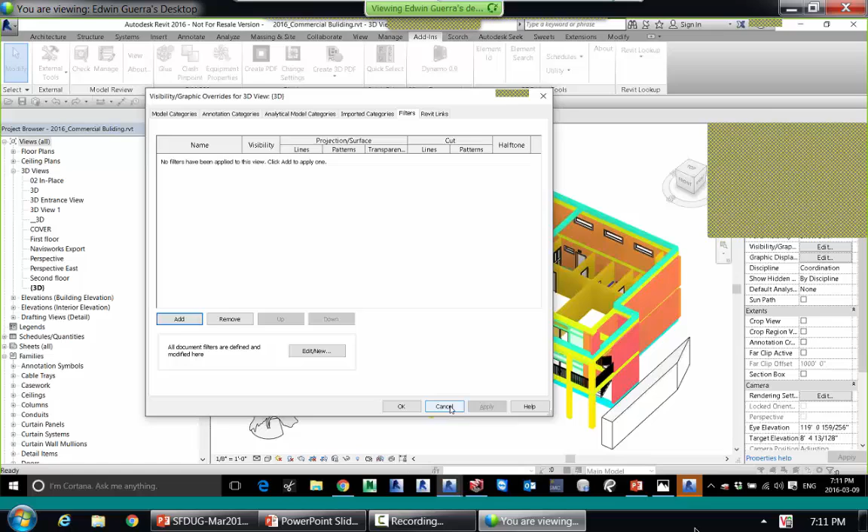So to me, filters might be nice if, for example, fire rating only has so many options and there's a consistent way the information is input. But in this case, we're using the element ID of the type, so we know how many types are loaded and how many are being used in the model. The ones not being used aren't counted. It's really automatic in the way it generates colors—of course you could find different colors or gradients that are more suitable. But the idea is that this is truly extendable to different consultants. Like if we're looking at a model generated by HOK versus Stantec versus someone else, we can use this reliably.

I see a question from online asking if the colors remain after you close Dynamo. The answer is yes. This node actually uses an override—it's as if you were clicking on something and saying override graphics in view by element, which normally isn't good practice because it's hard to track. But you can see that if you reset it, it'll go back to normal. So it's basically for this view only, and it's an override applied to that specific element. So if I were to save, close, and reopen, the color will be persistent, but only in this specific view.

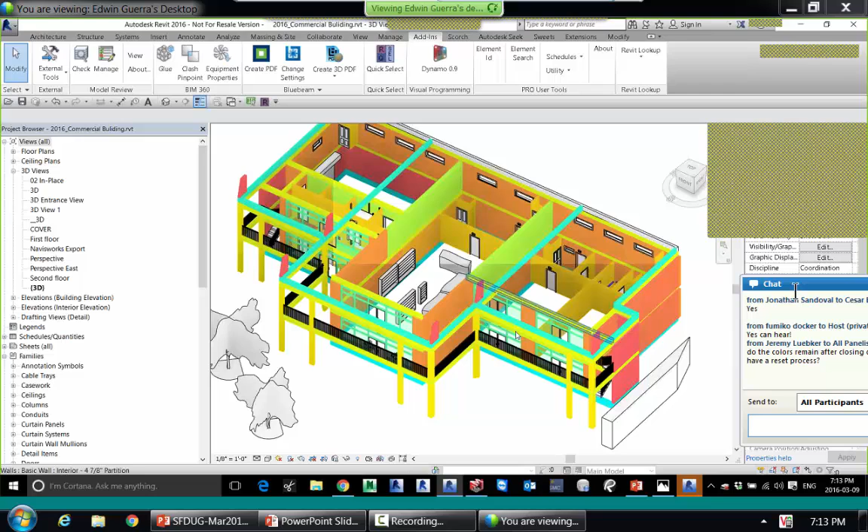And the reset process, as we said, is basically: if I wanted to reset this, I can select it all, filter so that I only have the elements I affected, then right-click, override graphics by element, and reset it. And now I'm back to normal.

Cesar, maybe I should ask—how do you normally share these Dynamo definitions? Do you do it on the website, or only with attendees? So this is the first time we do hands-on, and we pass around a USB, but I think the plan is for our website—moving forward, when the video is posted, we're also going to make available the DYN files that belong to it, so you can download it.

So that's great. Yeah, are you planning to share some of your definitions with us? Sure, yeah, I'll share them with you so you can find the best way to distribute them or post them. Great.

Any other question for Edwin? Here's another one from me. How's Dynamo being used in Canada?

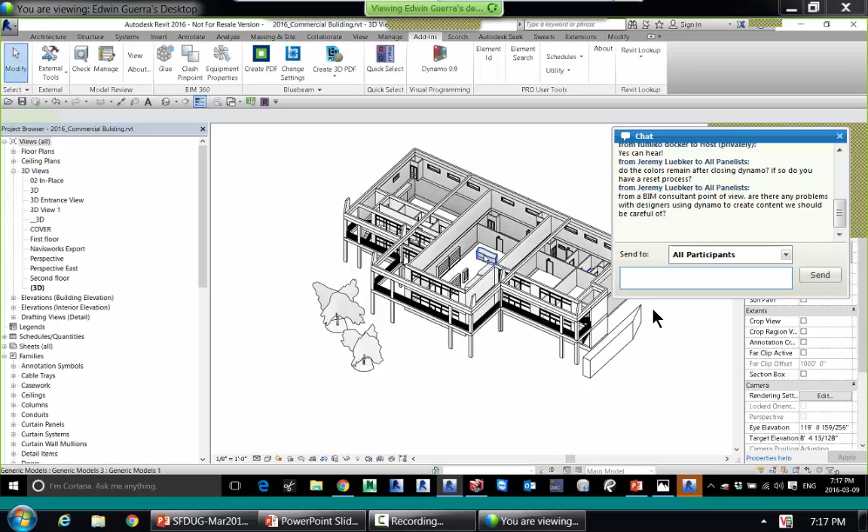Challenges like in-place families, generic models that may have families well defined within a category. Maybe someone made a funky furniture item and just left it as generic model. When we're assigning that information so that a trade can provide specs against it, we don't want to have to go into two different categories. We want to go to furniture and grab everything that's required there. So there's a lot of opportunities like that for designers to generate models that can support downstream usage, estimating, construction sequencing, and attaching data consistently.

Awesome. Any other questions? Can you speak more about Dynamo's ability to work with programs like RAM or SAP? He mentioned compatibility with Excel, between Revit, Excel and Dynamo, but since he's in the construction industry, I wonder if he's come across any other analysis software they've integrated with. I can't quite hear very well, but I hope someone can repeat.

I'll repeat that for you, Edwin. The question is if you have any experience of specifically interoperability between using Dynamo and SAP for structural engineering. Yeah, I haven't used it myself. I know there are some nodes that do some of that work, but unfortunately, I don't have direct experience.

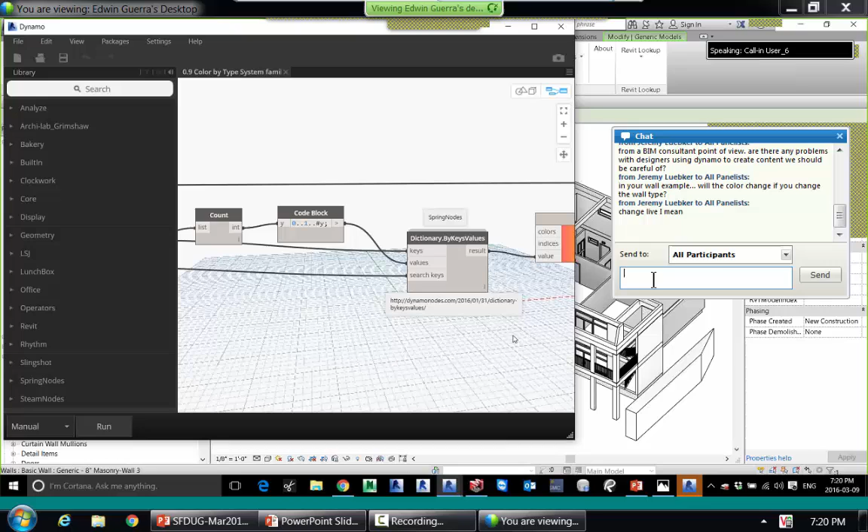Okay, so I just reran the script to illustrate the question. So the question is, if you change the type, will the color change? The answer is it won't change until you run again, so it's a one-time thing.

So when I run it again, now it detects that it's the same color as the other type, and then it will update. So that's something important to keep in mind, that these are scripts you have to run again. That's also in comparison to the filters we were talking about. If you were to set up the filters, it's very manually intensive, but the idea is that it will always be live, reflecting the condition of the model. Whereas this definition is something we have to run every time there's an update, which for us isn't a problem because we receive these at milestone submissions or established schedules.

Great. Any other question?

After you set up the coding for different model types, have you tried to transfer the geometry to other software but also keep the color coding? Like if you transfer the geometry to 3ds Max or Rhino, does the object still keep all the color coding?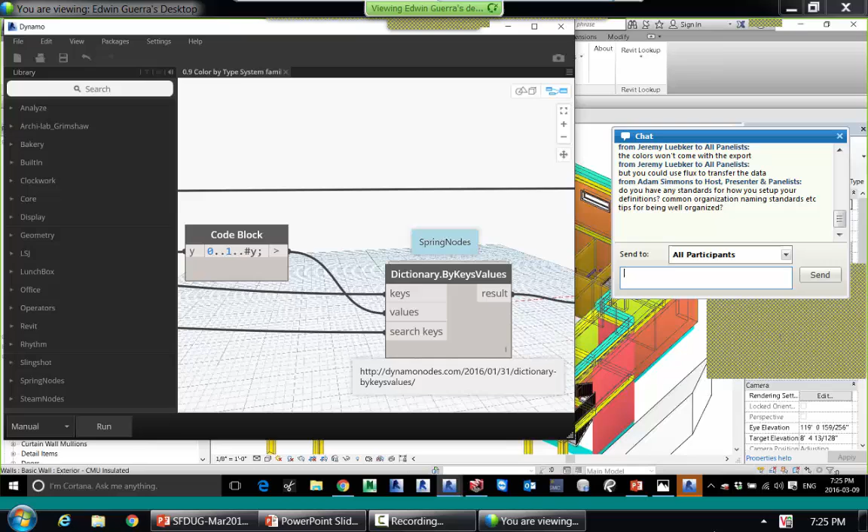And then the second part of that question is about common organization, naming standards, etc., tips for being well organized. Yeah, so we help develop those.

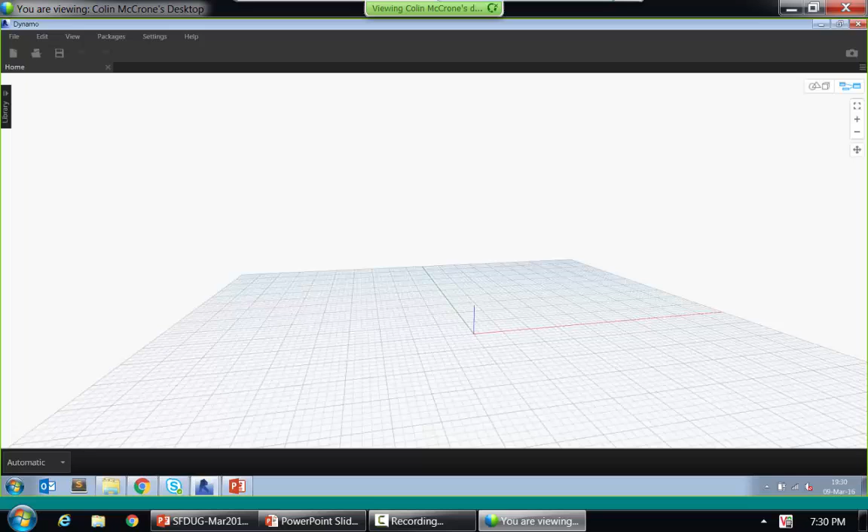Okay, so this is kind of like Sesame Street - today's meeting is brought to you by the node List.FilterByBoolMask. The idea is every meeting we'll do one really useful node, because there's maybe 10 to 20 nodes that are really useful. This one was the first candidate. It takes a list, any arbitrary data structure of anything, and a mask - a corresponding list of true and false values - and sorts it. Everything that corresponds to a true value, you keep; if it doesn't, it goes in the out category.

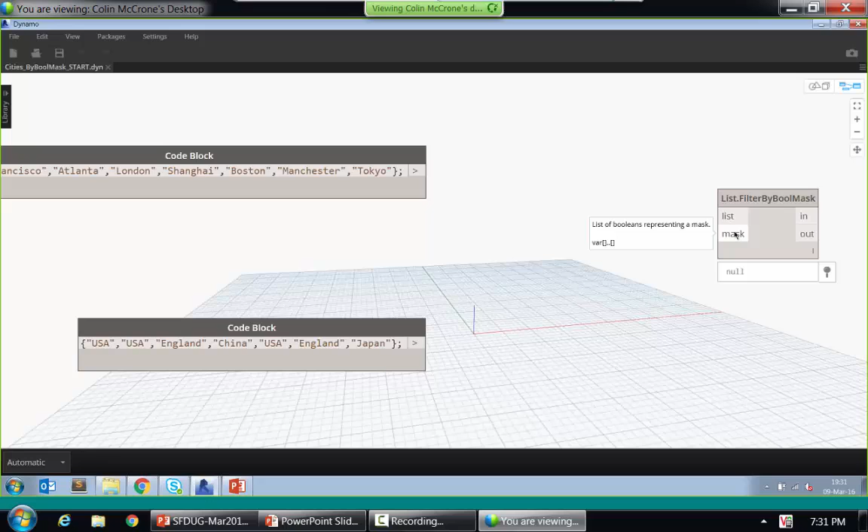So back to this example with the cities: here we have 7 cities, and here we have their corresponding countries. We can do something simple, like sort which ones are in the United States. This is the list we want to act on, what we want to filter. We need some logic to turn something else into a series of true/falses - one way would be to ask if the country name equals USA.

So we use equals, 2 equal signs for the equals-to operator. If you use a single equal sign in Dynamo, you're assigning something - like if I say x equals 7, that means x is 7. But if I say x equals 7 with two signs, that asks: does x equal 7? The answer is always true or false - they're 2 completely different things. So if you're asking a question, it's 2 equal signs. One thing you can ask is whether the country equals USA - is that true? You'll get a list of trues and falses.

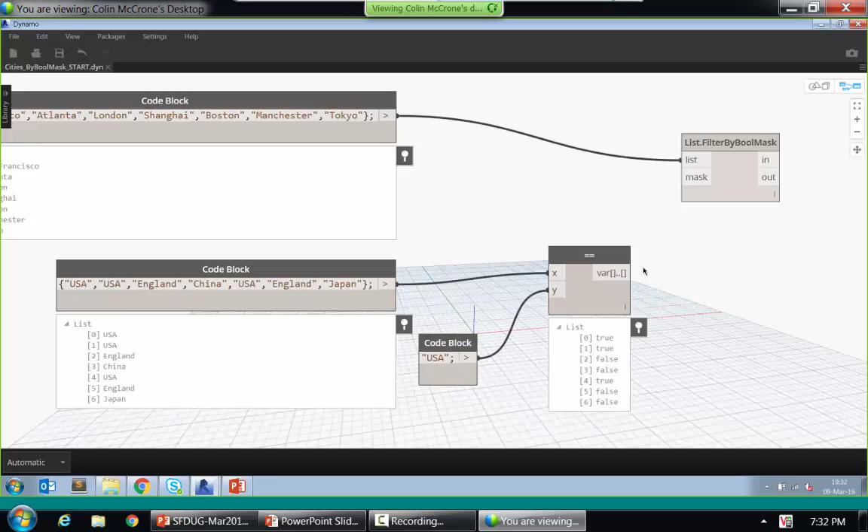So if that's the mask, the results are split into in and out, and I'll use 2 different watch nodes. In: San Francisco, Atlanta, Boston. Out: London, Shanghai, Manchester, and Tokyo. So that's one example of what you'd use that for. Just quickly, one other example, more geometry focused - I'll open up the sample in the core library: the attractor point.

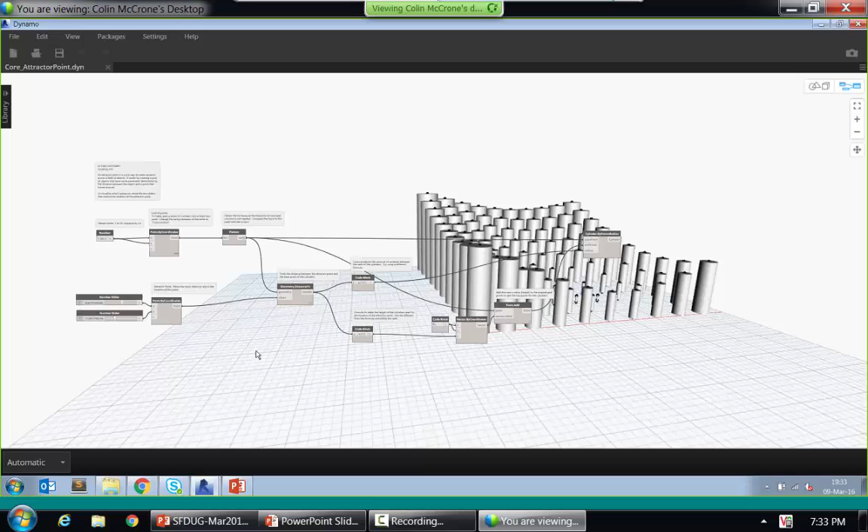So if you look at this, we change the manual type to automatic, so it's running continuously. One thing we could do is visualize only this part. If you've played around with this, you can move this point around, and you get this effect of the size of the cylinders based on the location of that point.

Here are the cylinders, but we can visualize them based on, for example, only showing cylinders within a distance of 30 from the point itself. I'm going to turn off the preview there, just a right click, and we'll look at just the cylinders visible within that radius using a list filter by bool mask filter node.

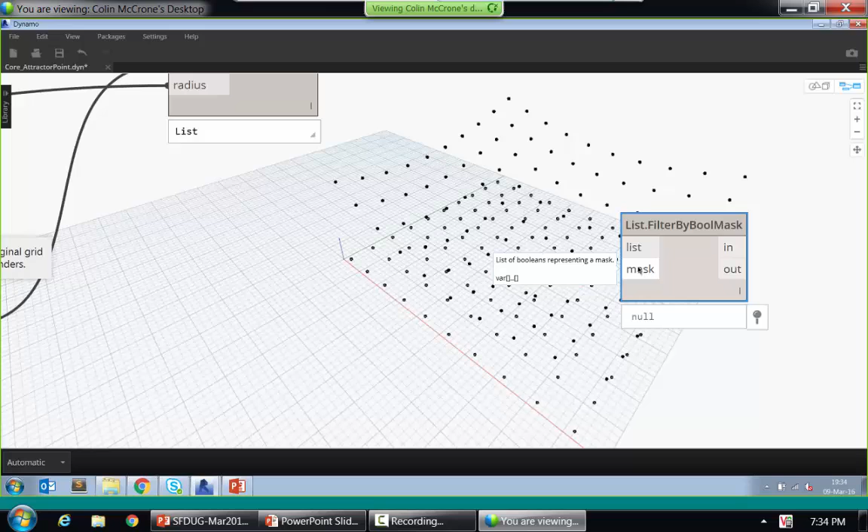From the data type discussion, remember bool is short for Boolean, just another name for that data type, true or false. The list is the cylinders themselves, and the mask needs to ask: is something within a certain radius?

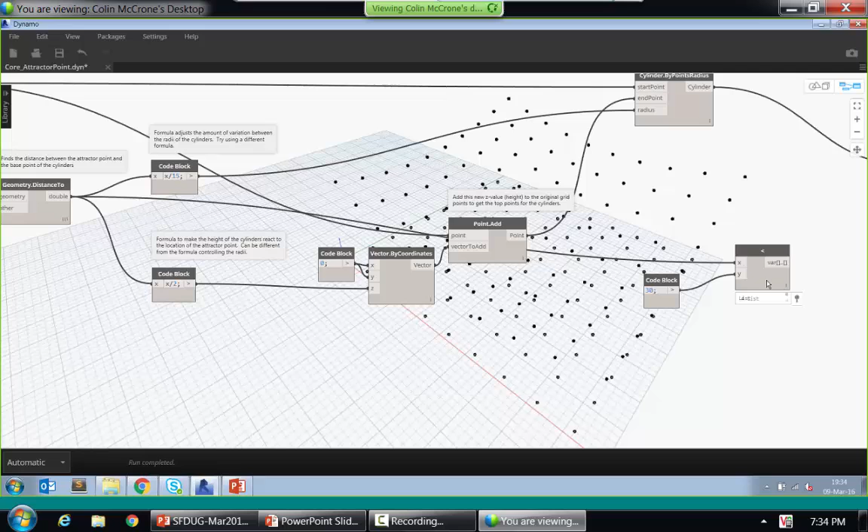So we need some sort of radius, let's say 30. Then we ask if something is within that radius, so not equals, but less than. I'll search for less than, and we want that distance, found here as Geometry.DistanceTo. This node finds the distance between the attractor point and the base of the cylinders - is that less than this value? If true, that's our mask.

Something went wrong, right? We see all of them. Actually, it's just because you're visualizing everything that's in and everything that's out. So if you want to see just one, I'll undo the preview, and do a pass-through variable here, just the ones that are in - these are just the ones within that radius.

I can make this a smaller radius to make it a little clearer. So as that point moves around, we should only ever see the ones within that radius.

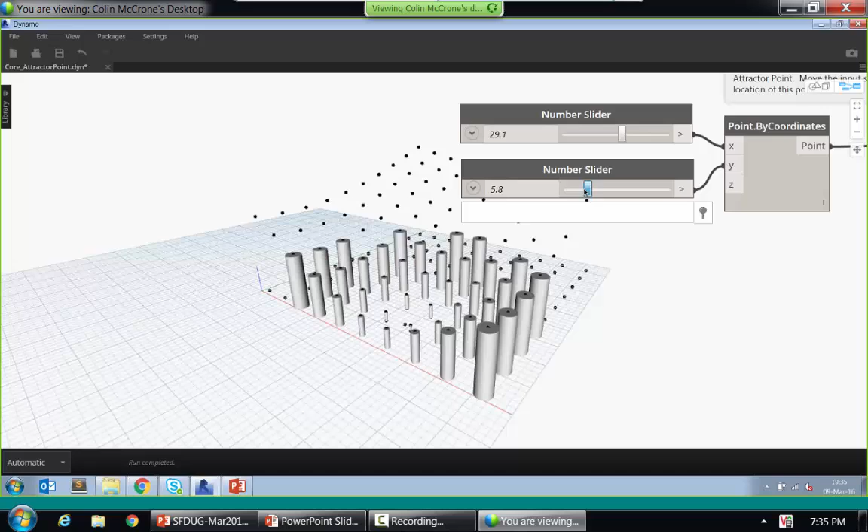Can you do that with two points rather than one point? Sure, you certainly could - you could have some logic based on the sum of these two things, for example.

To your question before, I wanted to answer that too - can you select things by a pattern? There are probably multiple ways to do this, but I got lost. Let me go over here. Okay, so let's make a series, and I'm going to say A, B, C, D.

E, and I kind of want to stop here. So I'm going to do every... oh fine, I'll do a couple more, H. All right, so this should be 8 letters right here, and if I want to select every third one...

Then what I might do is something like, is the index of - so I can take this. Oh sorry, not that way. Index. Thought there was a shortcut for this. There is a node, I forgot its name, so I'm not going to hold on. I'll just make a - how many things are here? So list.count.

So there are 8 things, and I'm going to make a series from 1 to that number. So this is a corresponding 1 through 8, and I want every third thing. So I can say, is this divisible by 3? Is that a question?

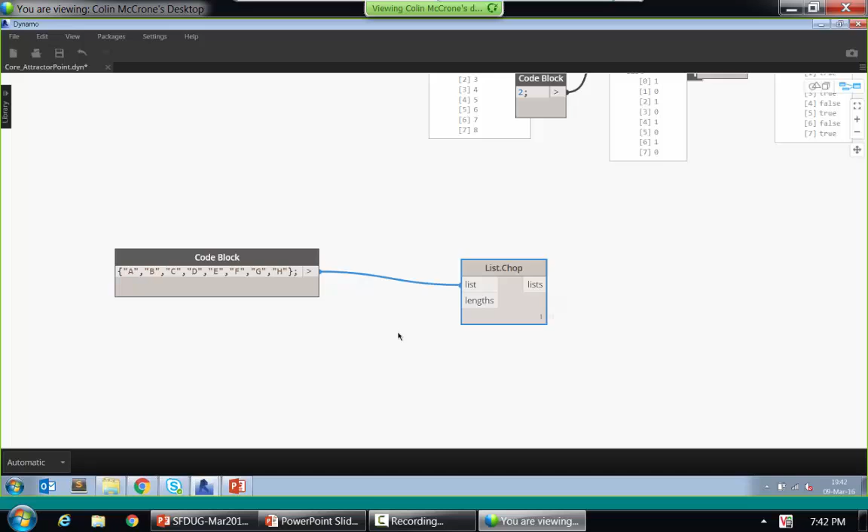So you could do something like list.chop, which will divide things into groups, you can either give this one length, in which case it'll repeat over and over again, like if I gave it 3, then it'll chop it up into groups of 3 until it just runs out. I could also give this a series of things and get individual values, and another thing. So it's the first 3, whereas the other one was doing every third. Okay, that's right. So this is another way to do it.

So you could actually just get this and get the last one item in each list. Now this thing is going to be the last item in the whole list, because this guy, if I hover over this, will take anything. It's var bracket bracket dot dot bracket bracket, and take anything. So if I want to be more specific, I have to be more specific. This answer is GH, because the thing is taking the last thing of the whole thing, because it eats anything, so it's not going to go searching for a list. It eats anything, so it's going to take the last thing of this list. So if I want the last item of each list, I have to force it, do List.Map. In which case, this is another way of taking every third thing.

If there were a couple of nested lists, how would you get into, say, a third nested list? Not just a pattern, but literally one thing. Right now you're using List.Map and it gets to the first nested list. If you had another nested list inside the second one, how would you get that? Okay, we could do that.

We can make this slightly more complex, going one more level deep, like one step further. I'm going to make this into pairs, so this is going to look a little weird. So this is now pairs of things. Okay, so here's the list now, and it's even more complex.

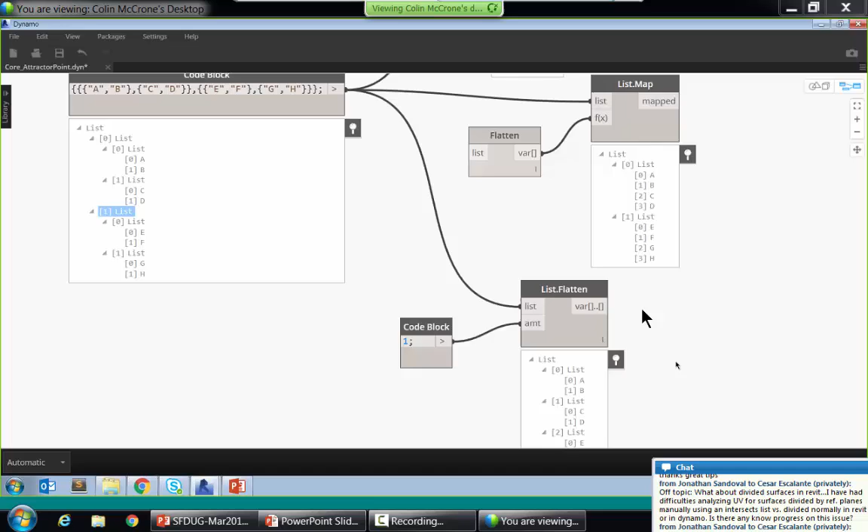Another way you could do it is if you want to flatten it from the right side in—you could use another node called List.Flatten, which lets you flatten a list by a certain amount. So you can say 1, and in this case I'll flatten from the other side. So you can mess with your data depending on what you want.

Generally, as a practice, you certainly can chain together List.Maps or List.Combines, but if you use the technique I showed earlier—encapsulating something with a custom node or even a custom code block definition—they work the same way, and you can generally avoid that. If you're using chains of List.Maps, there's probably a better way to do it.

We certainly can. Cool, thanks. Awesome.